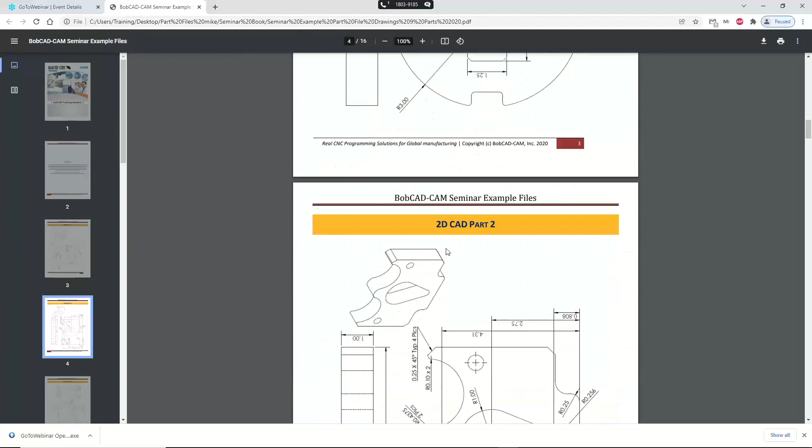All right, so here we have a little book. Some of you guys may have seen this before. I use it for a lot of my trainings. But we're going to just draw one of these parts. I know I did this one last time we did plasma, but I don't think I've done this one. So we'll do this real simple part. This training is not really for CAD. If you want to see more CAD, we have a few CAD videos on the BobCAD support website. But I'll just draw this one real quick. Very simple part to make.

And we're going to start off by drawing two circles, two arcs on the screen. One that's got a radius of 1 inch, one that's got a radius of 3 inches. We're going to center them right at XYZ 0. So we're going to start by going to Create 2D, and then Arc. We'll go with a radius of 1 inch, and then hit OK. And then we're going to do a radius of 3 inches, and then hit OK. And there is the two outer arcs for this part right here. So we have the inner there and the outer there. So again, a 1 inch radius and a 3 inch radius.

Now, after we have that done, we're just going to go into the rectangle command, and we're going to make two different size rectangles. One that is 3 by 1 1/4, and another one that is 1 by 1. Now, the 3 by 1 1/4 also has 1/8 inch chamfers on it. So remember, while you're creating your rectangle, if all four corners of the rectangle show a chamfer, put them in right then and there. That way you don't have to go back and add the chamfer later on. You could just have it in the model. So that has 1/8 inch chamfers, and the 1 by 1 square that we're going to make has 1/8 inch fillets. So we're just going to go back to BobCAD, and I'm going to go to rectangle.

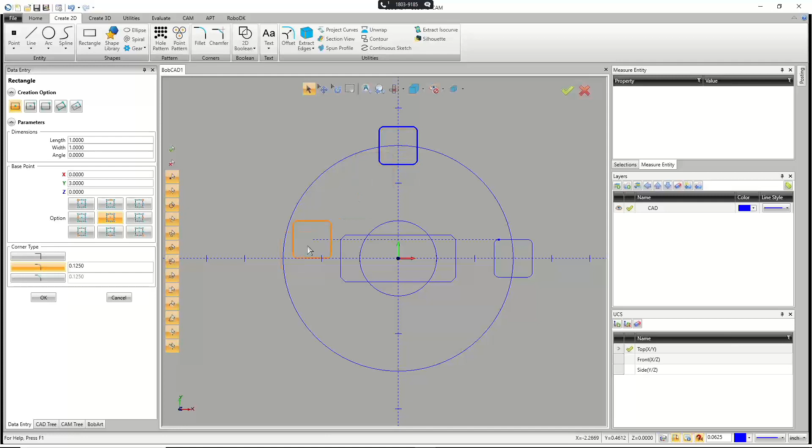Now what I can do is I'm just going to take the center of this square and I'm going to put it right at the 3 o'clock position. So I'm just going to click it and put it right there. Now you have multiple ways of creating the other 3 cuts. I'm going to do the simplest way because I'm already inside the feature for rectangle. So I'm just going to use the snap points to snap another one at 12 o'clock, another one at 9 o'clock, and another one at 6 o'clock. But you could have just used the original and done a rotate, and that's how I do it a lot of times when I'm teaching people how to use the rotate command.

From here, we then would use quick trim to trim away all the geometry normally. That's normally what I'd be using, but there's a feature that's overlooked a lot of times. I call it a luxury feature. It's not needed, but it is helpful. And so this feature is called 2D Boolean under the Create 2D. And it allows us to do adds and subtractions of wireframe geometry.

So for the inside pocket there, if we look at our drawing, I have no lines through here. So I want to get rid of all the intersecting lines that are inside this inside pocket that we have. Now, when we do the 2D Boolean, we have add, subtract, and intersect. Anytime you're trying to basically clear out the inside pieces of geometry, you're usually going to be adding two shapes together. And that's what we're about to do.

We're going to add the arc and the rectangle together. Again, this is a luxury feature. All the things I'm about to do, I could also do with just a quick trim. I could just go in and trim out all the entities just by clicking on it, but it's a lot more clicks. So I'm going to go up to 2D Boolean, and it starts off on add.

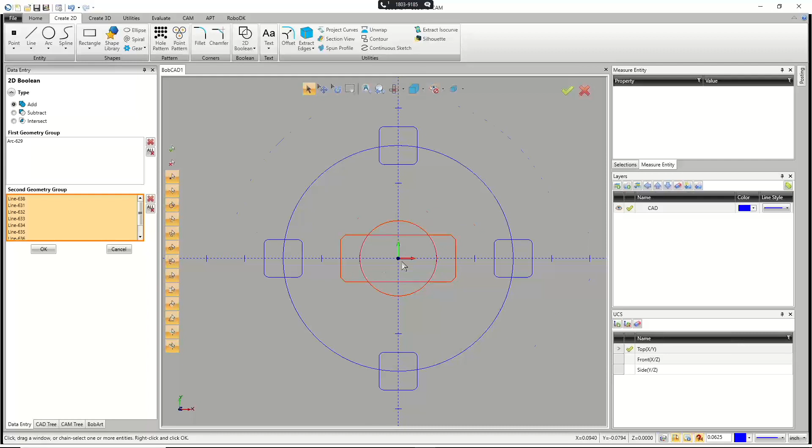And then if you actually zoom in on the feature and you look at it, my preview color currently is orange, but you can see that the outer border all the way around stays orange, and then the inner lines here are the selection color. They're red. And so what that's showing you is anything that's orange is going to stay, and anything that's red is going to disappear. So when I hit OK, it automatically trims that out. Again, you could just use quick trim for that as well.

The 2D Boolean feature is a great feature. It doesn't work for every situation, and that's why I usually would say use quick trim anyway, just because it is good for just about every situation. And the other side of this is going to be the subtract function. Now, with add, it doesn't matter if I pick the arc first or the rectangle. It doesn't matter which order I pick those in. I picked the arc, then the rectangle, but I could reverse that and it'd be just fine.

With the subtract function, you have to pick it in the correct order. And it's the same as if you ever do a 3D Boolean as well for a solid model. Basically, you want to pick what you want to keep and then pick what you want to remove from that. All right. So for me, I want to keep this arc and I want to remove all 4 squares from the arc. So I'm just holding shift and picking all 4 of these squares.

I don't have to hold shift when I pick the arc, by the way, because it's a single entity. If it was broken into multiple pieces, though, I definitely would have to hold shift and pick it. But just remember, holding shift and clicking on a chain of entities will do a chain select and grab all of them.

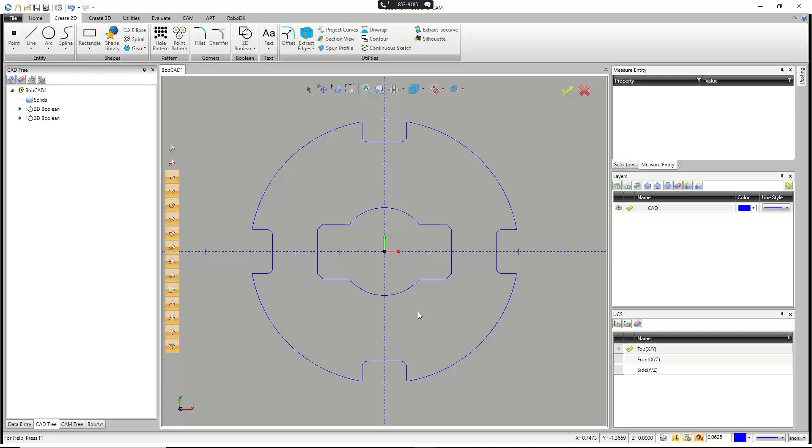So now what we have is, again, the preview showing what's going to stay, and it's all these little cutouts around here. So we can hit OK. It automatically trims it. Again, nothing different than if I had just used quick trim, but it is a little bit faster if I wasn't talking the whole time. So now what we need to do is just add some fillets onto the corners. The corners are 90 thousandths.

So we're just going to go to fillet and then chains because I want to do all the sharp corners. And then right here for the radius, I'll just say 90. And what chains is going to do is it's specifically looking for sharp corners that don't have a radius in them. The thing with this is it's even going to radius corners that already have a chamfer on them. So if I was to hold shift and pick this, you'll see we do add a little radius to that corner.

Not a bad idea if you're trying to get the most accurate look to your part, because, especially for a mill, it can never cut a perfectly sharp corner. Neither can most of the things we're doing. Everything's going to leave some sort of radius. It just depends on the diameter of our plasma or our water jet or whatever. So it will put it on any sharp corner.

So in our case, we're just going to hold shift and pick this. And the only sharp corners we have are these ones right here. Since these ones have a fillet in them already, it doesn't try and add another fillet or change the fillet. It's just going to do it to the sharp corners. So I'll just go ahead and hit OK, cancel out, and there is my little radius there. So there is the part. All right, so now we're ready to start machining.

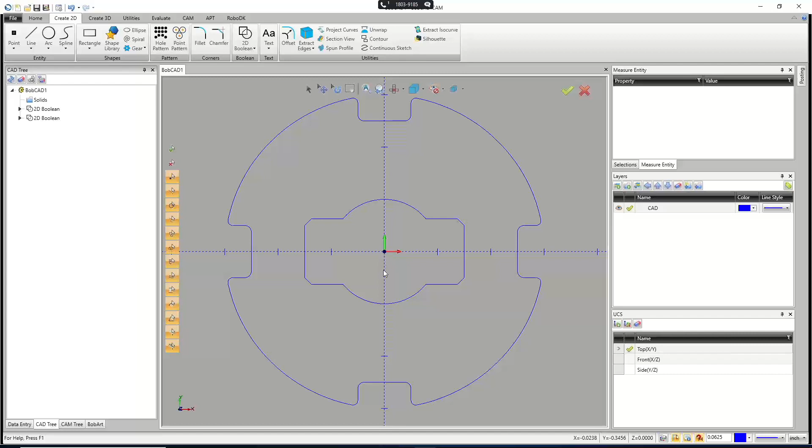Now, one thing that's been a constant issue, especially depending on your machine, is where do you set your parts up when you're going to cut this? Now, if your machine homes out in, say, the bottom XY corner, so say this is our home position. Depending on your machine, you may draw up in this quadrant right here. You may draw in this quadrant here.

It just depends on where your machine homes out from and where the negative Y values and negative X values are versus positive Ys. Basically, if you set your machine in the corner of the table and you jog the machine in a positive direction, if it can go positive, it would be based on these two coordinates. The direction those arrows are pointing in are your positive directions.

Now, the way that I kind of think about this is if I'm working on a machine. I actually just finished a training a little while ago, and the guy has just a 2x2 router. So we'll keep it simple. We'll go 24x24. This is the same as any of you guys that have a 4x8, 5x10, whatever size table you have. Basically I could go in here and say it's 24 by 24.

And right now, BobCAD's going to center that rectangle on XYZ0 because my base point is XYZ0, and I said, go put the center on there. But really when I do this, what I like to do is choose one of these 4 corner buttons, and that will be kind of my origin. So again, you need to know where that origin needs to be placed on the machine.

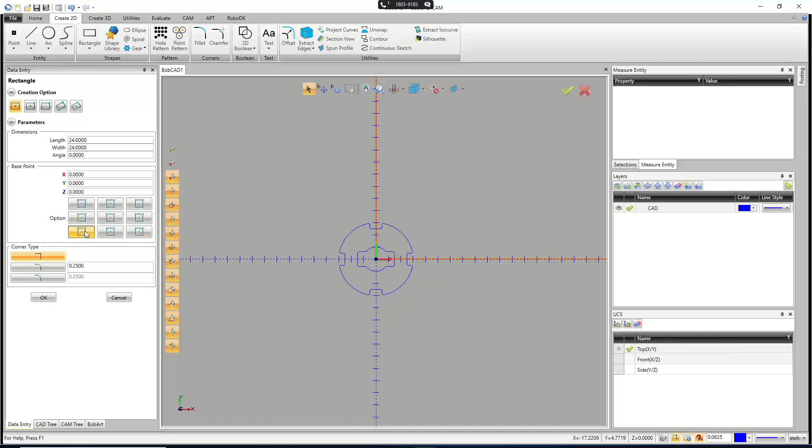And then I could go ahead and pick, I'm going to say it's all up in the upper right-hand quadrant. So I'll say use the bottom left-hand corner and put it at XYZ0. And I'll hit OK and cancel out. And what we see now is kind of a visual representation of that material sitting on the machine.

So basically, if all my code is based off of this point right here, and I have a sheet of material on the machine, I can move this part anywhere inside that rectangle where it fits, and it should give me a good cut. So before I go and do any toolpathing, I need to move this part.

But I also want to talk about how some of your machines don't have a work offset. Your machine might use a G92 in the beginning of the code. The G92 is the home position from where the head is currently sitting at the machine. So if your machine uses a G92, you're just going to put the plasma or waterjet near the area you want to start. And then when you hit start, it takes that location as your 0, 0, and all your code's based off of that.

So let me just grab this part real quick. I'm just going to go home and copy, and then I'll open a new window, and I'm just going to paste it down right there in the middle. Now, right now, we're visualizing an entire table that we're going to be working with. But say I didn't have a full table worth of material. I just had one piece of material out on the machine.

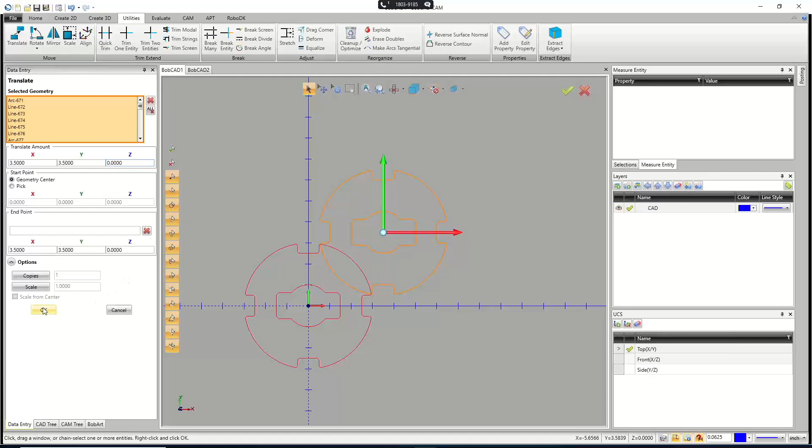So we're going to go a little bit more. I'll go 3.5 inches over, and that'll give me now a 1/2 inch gap between the edge of the material and the part. I'm saying I have 1/2 inch margins. Now, since this is a round part, we could also shift up in Y the same amount, 3.5, and it'll put it right there. When we're done, we can hit OK and then cancel out.

So now visually, we can see that I'm cutting one of these parts on that sheet. And what we're going to do in a few minutes is we're actually going to cut a bunch of these. We're going to do a pattern of these parts.

So just to do one machining job for now, I'm just going to go over to my CAM tree. And right here where it says CAM defaults, to start a new job, we're going to right click and go to new job.

Now inside of here, we have our milling job type. A lot of you guys might have just the milling. You don't have lathe or mill turn or wire EDM. So it's going to be the only option you have.

Now, if you're using BobCAD for only your laser, your plasma, or your Waterjet, I would recommend getting your machine saved as a default so that you don't have to change it.

For some of you guys, though, I know that you have both mills, lathes, as well as a plasma. I've worked with some of you guys in doing some online training before. So you might have a different default machine that pops up. We just need to make sure that BobCAD knows that we're using a laser, a plasma, or a Waterjet.

And usually when you get a post created by the post department, they will give you a machine and the post processor, so it's something that should pop up. And when you install a post from the posting guys, it'll also set the default for that machine, so you won't have to come back and change that.

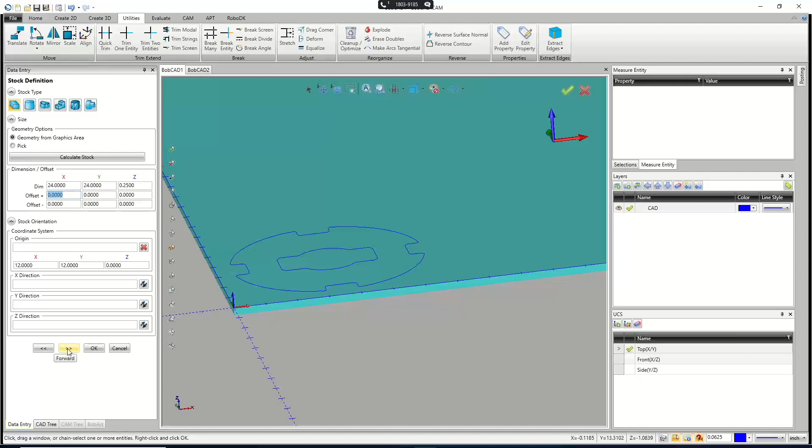And then when we hit the next arrow here, or the forward button, the origin pops up right there at the top of my part at that XYZ0 location. And that's the whole reason we put our rectangle, our stock on the screen, was so that we can see where our coordinates are going to be based off of in that bottom left-hand corner, and also so I don't have to actually pick anything or change anything. So now I can go ahead and hit OK.

And there is my job setup. So the whole job is set up. For now, we'll just cut one, but then we'll turn it into a few more. So there is my part. I'm then going to right-click on Machine Setup 1 and go down to the Mill 2 axis.

Now, inside of here, when we say Select Geometry, we're just going to pick all the geometry we want to run right there. Always look at your chains. We have one pocket on the inside and one profile on the outside, or it's all profiles, really. But we should have that many chains. There's 2 chains currently showing.

The other thing we can do at this point right now is set up the start points for these. This is where the leads are going to happen. So I'll start the leads for the outer cut right on the middle of this line here, or let's do it closer to our origin. We'll do it right there. And then the center pocket, I'm going to pick the straight line here.

Now, one thing to pay attention to is the direction that you're cutting in. And if this was a mill and we were climb milling, I would need to reverse the direction of both of these features, because for a climb mill, I need to compensate to the left. And to the left of both of these features puts us on the inside here and the outside here, so it's reversed. But with laser, plasma, waterjet, you don't have a rotational force like you do with an end mill.

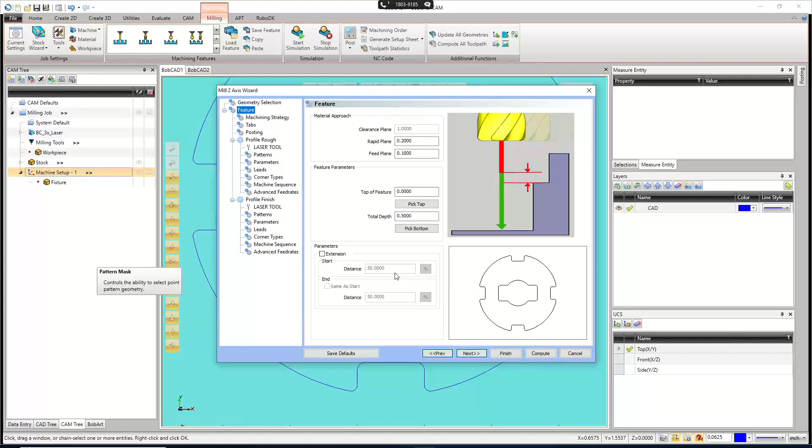So the 1/2 inch depth is fine. I mean, I have a 1/4 inch, but a 1/2 inch is fine because you're cutting through the part. You're going all the way through with this. And so when we're done, we can hit OK and then hit next. Right here for the feature page, top of features at 0, total depth is at just a 1/2 inch. So nothing to really change there. I'm fine with the depth, so next again.

For the machining strategy, there's only one toolpath you're going to use, and it's a profile finish. So you click on Profile Rough and hit this red X here, and you're left with just your profile finish. From there, you just hit Next, and you have tabs. Now, I'm going to do a little example of how I would do tabs on a part like this. I do not use this tab function. I actually just draw my tabs, and I'll show you real easy how I do it. And so we'll go ahead and hit Next for now.

Right here, we have our posting tab. So really the only thing you need to pay attention to here is if your machine uses a work offset, you need to make sure this matches the work offset value you plan on using. So if it's a G54, then work offset number 1 would be the G54. 2 would be G55. 3 would be G56, and so on.

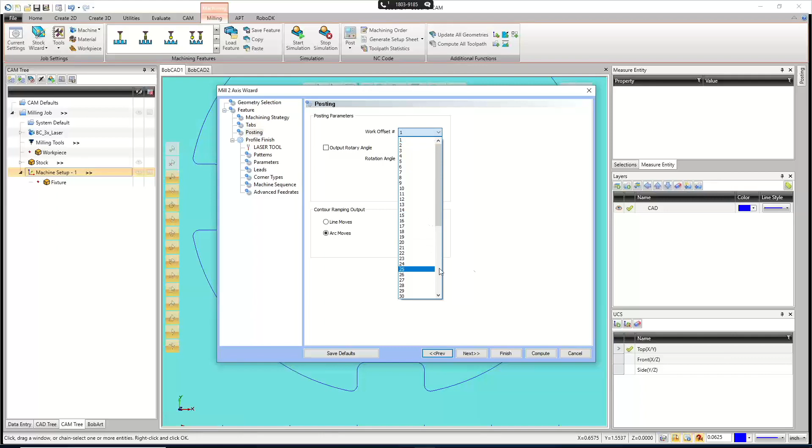Next, again, we finally get to define the laser that we're using. So we set up the diameter. This might be something you don't know off the top of your head. You might have to do some testing or contact whoever makes the nozzles for your machine and just find out what they would recommend for the diameter. You might be able to look in the manual as well and see if there's anything listed out.

You'll see right there for the diameter. Right now it's set to, we'll say, 10 thousandths. I'm going to leave it there. This is a laser, but your waterjet or plasma is probably going to be a little bit bigger than this. This is one of the smaller options you can get with the diameter.

At the beginning of this, I was talking about the two different ways you'll set up a toolpath here in BobCAD. The two ways are either you're going to be setting up all your feeds and speeds, and in this case, you could set up your cutter, your gas, and your shutter.

You're going to set it up either in BobCAD or not. Right now, if I don't add any feeds and speeds to this, when I go to compute my code, I'm essentially just giving it the path to follow, and then at the machine I can set up the cutting conditions. If you're lucky enough to have a machine like that, it makes BobCAD a lot easier, because really you make one toolpath and it doesn't matter the thickness of the material. You just give it the path to follow, and then at the machine you define the thickness, the pierce, all that stuff.

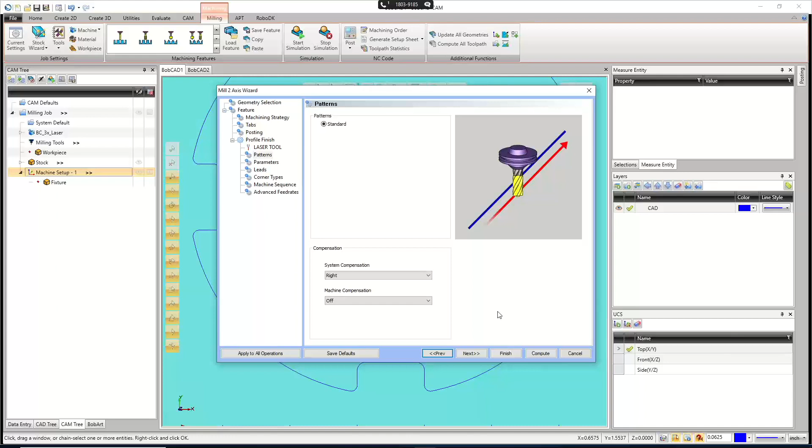So next we then have our parameters. This is a finish pass, and specifically we use finish passes because they're made for finishing.

Move my microphone, give me one second. I got to take a drink.

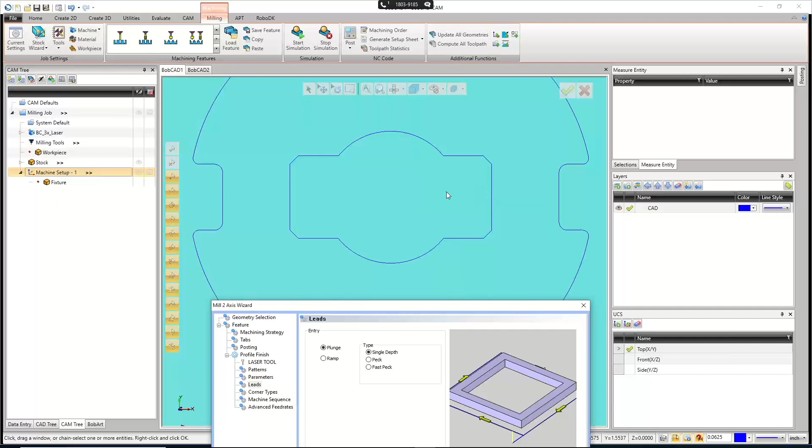Now, one other thing you can do just in case is when you lead in, you can cut around the part, and then either lead in or lead out in the exact same spot you led in from, or right here we could do an overlap amount. And the overlap amount allows us to just say, I want to go past where I led in from by, we'll just say 100 thousandths, and then have our lead out happen. Perfect. We'll go next. Right here for the corner types, I'm not changing anything on that page. Just going to hit next again.

As far as machine sequencing goes, I always use optimized. BobCAD is smart enough to recognize inside versus outside shapes. So it knows that it needs to go cut the pocket of this geometry before it cuts the outside profile. So we shouldn't have to worry about it. The sorting's pretty good. And really, it's two pieces, but it's one internal and one external. So there really is no wrong sorting for this.

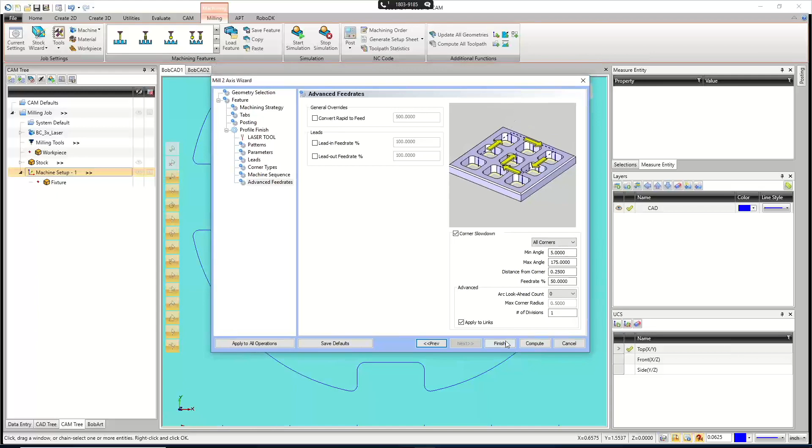And finally, we then have our advanced feed rates. So we can convert our rapids to feeds, which shouldn't be anything you need to really take care of here. Your lead in, lead out feed, none of this really matters. Down here, though, is the corner slowdown. Now, you got to think, I'm just going to hit finish on here. As you go and make a cut, and I'll try and figure out how I can show this.

A lot of people picture the cut that you make a little bit differently than what it really is. And for those of you that have used a hand plasma, you kind of know what it's like. The stream of plasma is not going straight down. As it's moving, it's actually got a curve. It kind of goes backwards. So what ends up happening is when you get into a corner, basically we want the plasma to catch back up with itself.

We want the end of the plasma that's blasting through the material to straighten itself back out. So what this corner slowdown option allows us to do is say when I get close to a corner, so I can do it for all the corners, I can tell it within a quarter inch of a corner, I want to slow down to a 50% feed rate. And what that's going to do is as we encounter that corner, it'll slow everything down, kind of let the plasma catch up to itself, and then make the turn so we don't accidentally blow off a corner or just have a really bad finish in the corner.

This corner slowdown is specifically made for mostly plasma, but you could use it for your laser as well as your water jet. But I'm not going to run anything like that right now. When we can't hit next anymore, we're just going to hit compute. Now, this is a really small tool path, so I'm going to go ahead and blank out my stock right here, and then I'll zoom in, and there is my tool path. It's only 10 thousandths, so I'm only offset by 5 thousandths right now, and there's our one part.

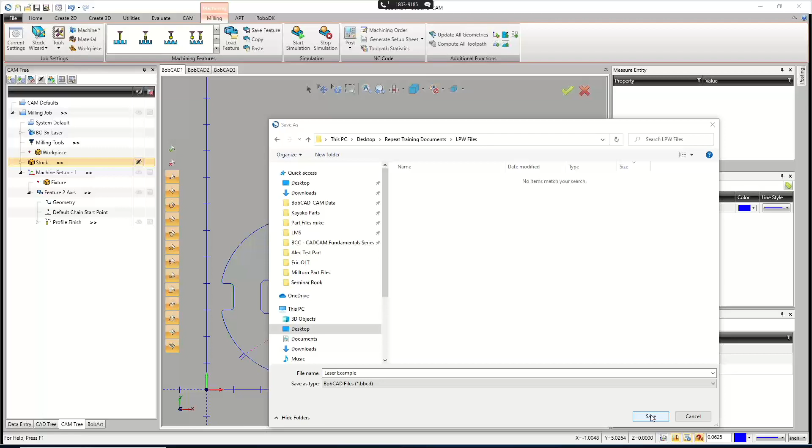So I'm just going to go ahead and say save as, and let me put this on desktop, repeat training. Did I not make a folder? All right, so let me go ahead and make a folder real quick. And I'll call it Laser Plasma Waterjet Files. And say open. And then we'll do, this is the laser example. All right, there we go. All right, so we now have it saved. So I always make sure to save right before I launch the simulation. Anytime I launch the simulation, I save.

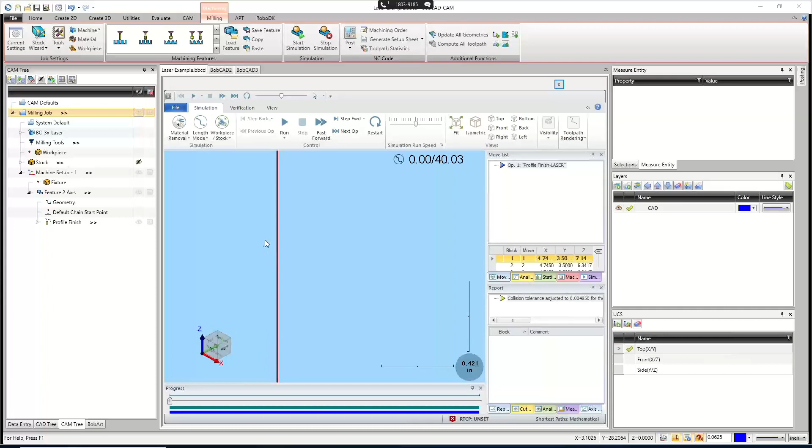So we're going to go right here to start simulation. And we'll just wait for it to load up. Now your laser and your plasma, and we're going to do a plasma example because it's a little bigger, show up as red in here, and your water jet will show up as blue. But essentially what it looks like is it's almost like there's an end mill, in this case, a real tiny end mill. And that's just the view of it. That's how it sets it up, just so we can see everything. So I'll set my speed a little slow on this. It shouldn't take too long to run. And then just say run.

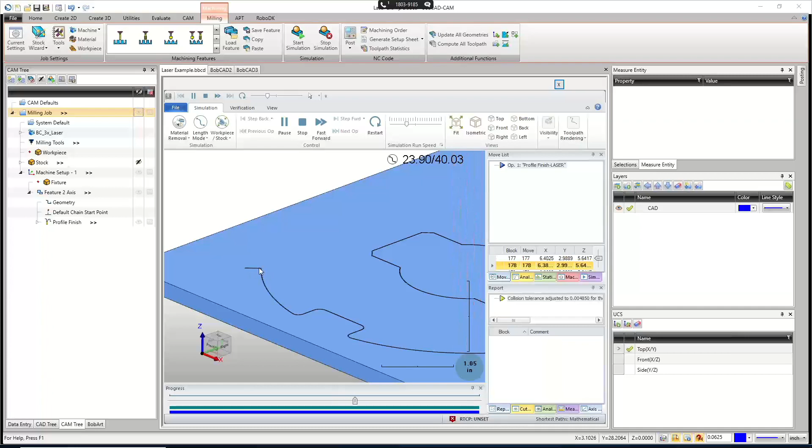And we'll see. There's our first lead in. And we should be coming through the whole part, so we should see the same thing on the other side. And there's our lead in and around over the end, and then leads out. And we should have the same thing here when we do that. We'll overlap that and then come out. At that point, it doesn't matter. That part's free as soon as it closes the cut anyway. But there we go. It's just going to cut its way around. And right there. So there we have it.

Now to see that individual part, there's a feature in here that some of you guys might have clicked on by accident before because it's really annoying when you don't know what it is. Under the measure tab here, normally when you're working in the simulation, you want to leave this guy on off. And the reason being, when you rotate inside the simulation, you left click and hold and move your mouse to rotate. But the way you do a shortcut rotate inside of the CAD window where we drew this part is by clicking the middle mouse wheel like a button and moving your cursor. The problem is I always come into here and use my middle mouse wheel as my rotate command because I always forget that it's a left click inside the simulation.

So if the measure entity or the measure box is turned on to something, it will actually do those things as you click on them. So I'm putting down points on that surface.

What I really want to do is down here we have the remove chips options. So there's remove chips, select chips, which allows me to go in and pick what I want to get rid of. So if I click this middle section with my middle mouse wheel, it'll trim away the inside. If I click the outer piece, it'll trim away the outside because it's no longer connected to that material. And so now I can see what my part should come out looking like and overall the finish and everything.

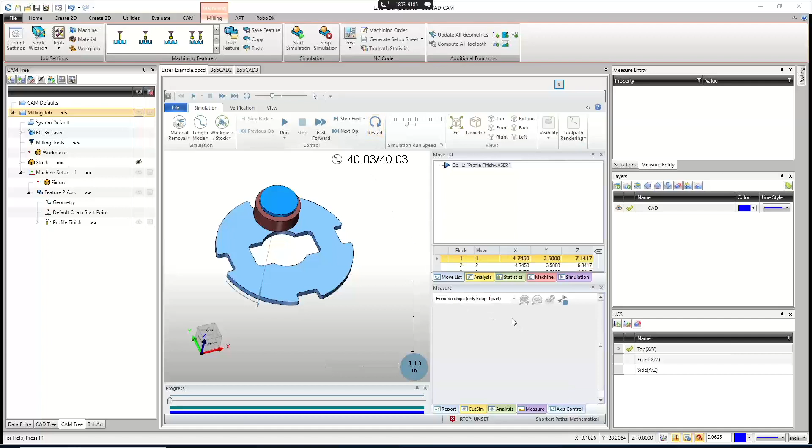Another way of doing this, and I don't recommend running it this way, especially with a sheet this large, but there is an option called remove chips by volume. And this one allows you to remove chips that are smaller than a certain size and also remove any chips that happen during the simulation. So as the simulation's running, as it finishes a cut, it should automatically disappear. So right here, as it finishes this part, the inside should automatically disappear.

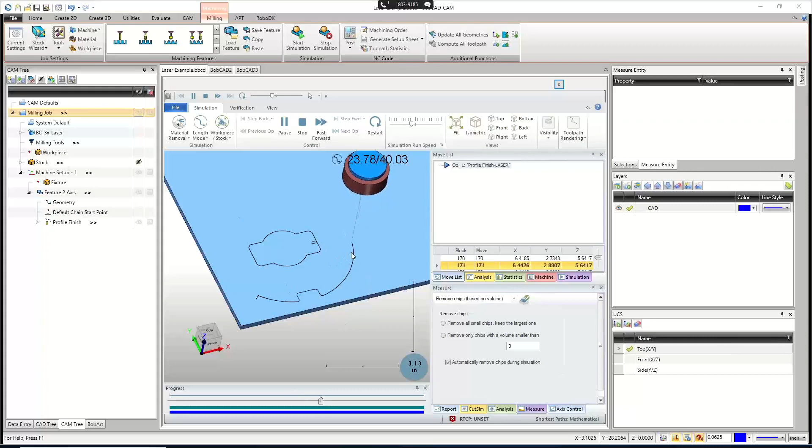Now, we might run into some problems with this one because the larger piece of stock might be around it. Normally, I would use this on a bunch of parts where the sheet isn't the biggest area, I guess. But there it is, same cut. And there we go. So nothing fell out. I just have to do my remove chips. Nothing's seen as small enough because I didn't really do this.

So I'd have to say remove chips with a volume smaller than, I don't know, 1. And so I'll say refresh. That didn't do anything. We'll say 2. I don't know what kind of measurement this thing uses. There it is. So whatever the volume is smaller than 2 of, I don't know what units, but you'll see it automatically got rid of that piece. And if I went bigger and bigger, eventually this piece would disappear and leave just the stock around there. So just be aware that that is a thing.

When you're done using this remove chips button, though, make sure to turn it back off. Because if you accidentally come in here and click with your middle mouse wheel, it'll get rid of a lot of material. And clicking with the middle mouse wheel, even in the middle of a feature, will actually trim away that geometry as well. So just be aware of it. It's the differences in how we rotate between the CAD window and the simulation. So I do it all the time and accidentally trim geometry out that I didn't mean to. But there it is.

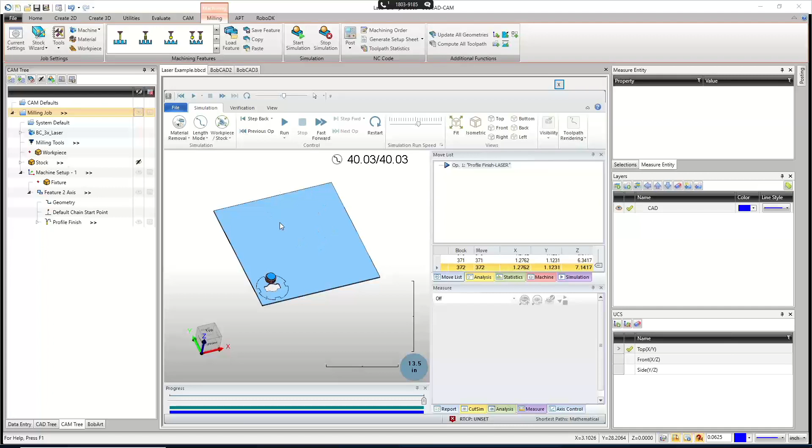So what was I talking about with saving toolpaths earlier? Well, after we have this toolpath done, and in my case, the way I set it up right now is I said that the feeds and speeds don't matter. I'm setting up all the cutting conditions out at the machine. So at this point, I could actually save this toolpath. So I'm just going to right-click on the Feature 2 axis and say Save Feature. And then this is going to be my laser profile. And then just say Save.

Now, after I have that saved, and this is the best part, I'll pretend I'm starting a whole new job. And so there's no toolpath on here. Well, now what I can do is I've got my geometry in the right location. I've got the stock drawn out. And so when I go and do this, it's going to be the same steps. I'm going to go create my stock wizard. This time I'll do the laser again because I got that saved. And then I'll load my stock wizard. I'll create a piece of stock.

I'll set my thickness. And again, because I don't have feeds and speeds and I'm going to do all my cutting conditions out at the machine, I could now set this to whatever I want. For the tool path that I saved, the depth is set to 1/2 inch. So if I want to simulate properly, I would want to make this smaller than 1/2 inch, or go and resave that tool path and have it go 2 inches deep.

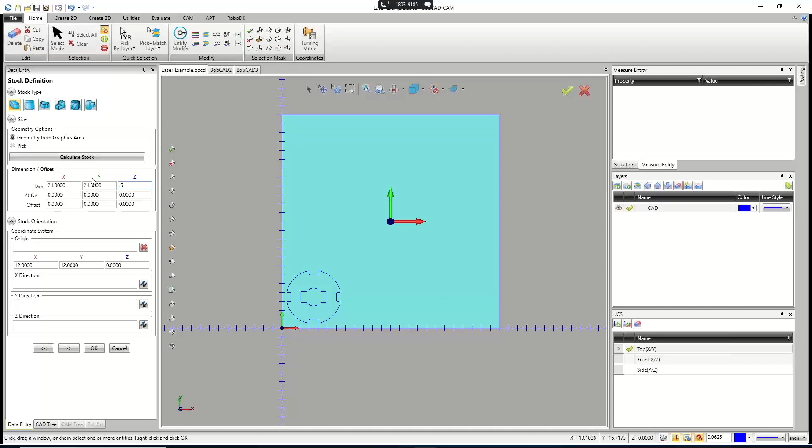The depth that we set inside the feature is irrelevant with all these machines because you're riding around on the top of it and blasting through. So it really doesn't matter. But I'll go with the 1/2 inch thickness and then hit next. And then right here, our origin is in the same spot, and then hit OK.

Now from here, I can just right click on Machine Setup 1, go down to Load Feature, and I'm going to choose my laser profile and hit Open. It'll ask if I want to use the same top and depth values. Absolutely. The top for every one of these jobs should be 0. And then the depth is kind of irrelevant. But again, to make it simulate properly, you need to make sure your depth is at least thicker than your stock or the same size. In my case, it's a 1/2 inch. We should get a result.

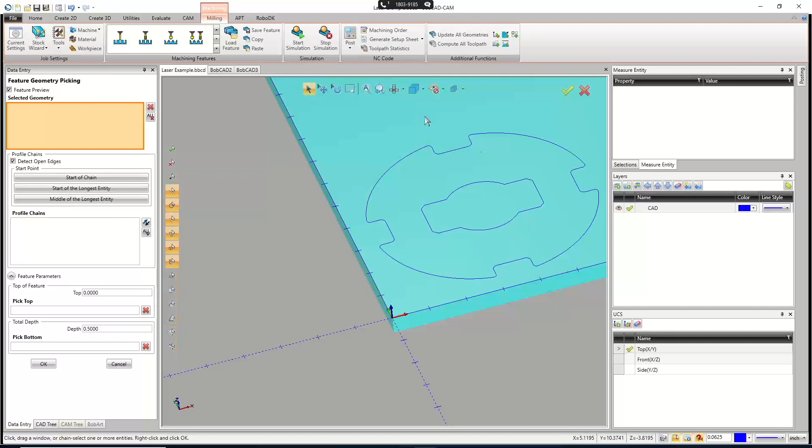After you load a toolpath, it's the same as copy and paste. So copy and paste, save and load. Whenever you copy a toolpath or you load a toolpath that's been saved, the geometry is the only thing that we forget about. So if I right click on the word geometry here and say reselect, let me go to a top view, I can pick all my geometry once again. And then over here under profile chains, I would then go in and make sure to pick my start points.

And again, I'm not reversing the direction of this because right now my toolpath is saved with a right-sided compensation.

Whoops, sorry, I punched the microphone there.

So for this one, to the right puts us on the outside, and for this one, to the right puts us on the inside. I explained it to someone last week, and he liked it a lot. That's how he kept thinking about it. But the way I've always pictured how I know if I'm supposed to go to the left or the right is I picture myself walking down the line. Left side, in this case, puts us on the inside. Right side puts us on the outside.

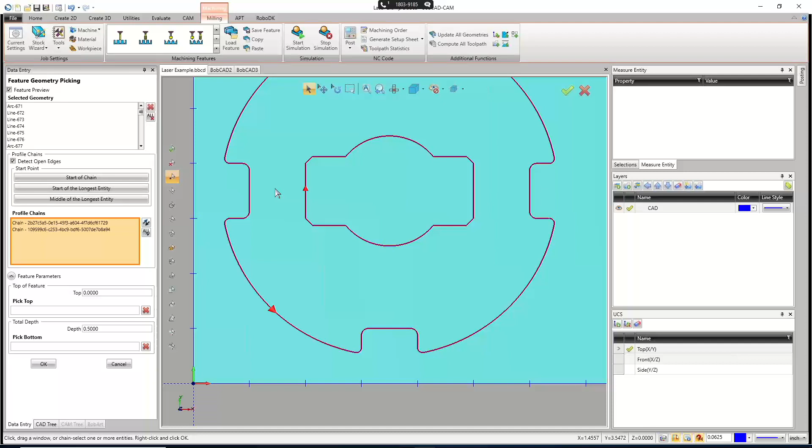It's a real easy thing to picture because even some guys get confused when the arrow's pointing a different way. If that's the case, move it to the other side. And now you'll see, okay, to the right puts us inside, to the left puts us outside. We always want to set up our geometry for however we set up the toolpath. And for me, that was with a right side compensation. So all I got to do is hit OK, compute that toolpath, and there it is. We're done.

All right. When it comes to posting, how do we post? We just say post up at the top. You got to make sure you have the correct post processor first, but I'll just say post, and there is all of my code. Now, another thing we can do is make an array of parts. So I want to fit a few of these in here, get a whole sheet of these things. And we need to just know kind of how many are going to fit.

And the way I do this is with the translate function. So first, let me blank out my stock here, and I'll blank out my toolpath. Now, you do not have to move the geometry. That's one of the biggest things here. You don't actually have to make copies of the geometry. I'm going to, and then I'll hide them to show you. But I do like to make copies of them first, just so I know how many I can fit. So I'll go up to the Utilities tab, and then I'm going to use the translate function.

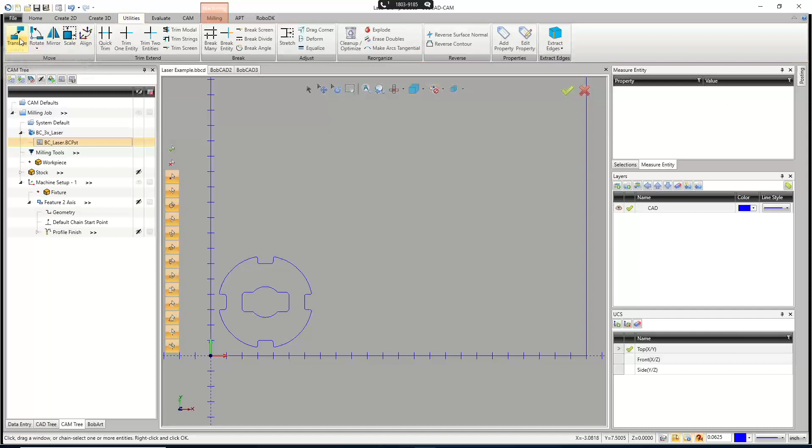Just like before, I know where I'm sitting, and I just need to make sure I give a gap large enough to fit parts between this. So I'm just going to go ahead and pick that part. And then in my y-axis, we're not going to move for now. We're just going to set up enough that I can fit 2 of these next to each other. So it should be about 6. And for this laser, that's actually probably close enough because the laser's only 10 thousandths wide. But for now, just to set it up the same way, I'll go 6 1/4. So 6.25.

Just like that. From there, I can then say how many copies fit. Well, I think 3 is the only value. I think we can only fit 3. So you'll see if I add 3 copies, it gives us 4 because we take the original and then add the number of copies. And so you'll see we're sticking out past the edge of the part right there. So I'd have to go with 2.

Now, I'm wasting a bit of sheet, but we could adjust things and kind of move things around later on. But I'll go ahead and hit OK. And then from there, I'm just going to drag a box over all 3 of those parts. And I'm going to offset them upward. So we're going to zero out the X and put a 6.25 for the Y. And now I have 9.

And I can't fit another part there. Definitely not, because it's the same width as before. Yeah, okay. So we'll go 2 copies and then just hit OK. So now I'd be cutting 9 of these parts out. And this isn't the most efficient way of cutting these arcs.

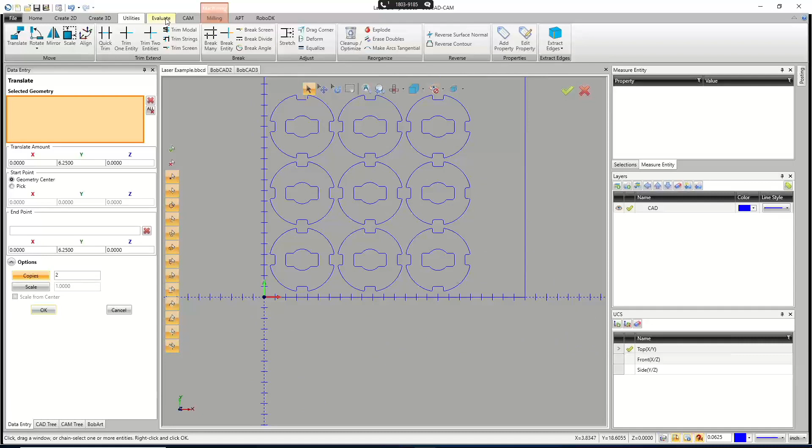Really what I'd want to do is probably go to my translate feature again and pick all of these middle shapes. Let's see if I can get this right down the middle. We could pick all 3 of these, and then I would shift them over. So I'll say about 3 inches, because that's the diameter. And that would center us up in the middle, and then we could tighten that in and actually move these down a little bit. I still have copies turned on, turn those off.

So the orange that we see there would be the new positions of these 3. Still only going to fit 3 parts, though. We might be able to move these close enough. Really, it's my margins that are probably throwing us off. And, well, actually, it's the fact that we're using a 24 by 24 piece of stock right now.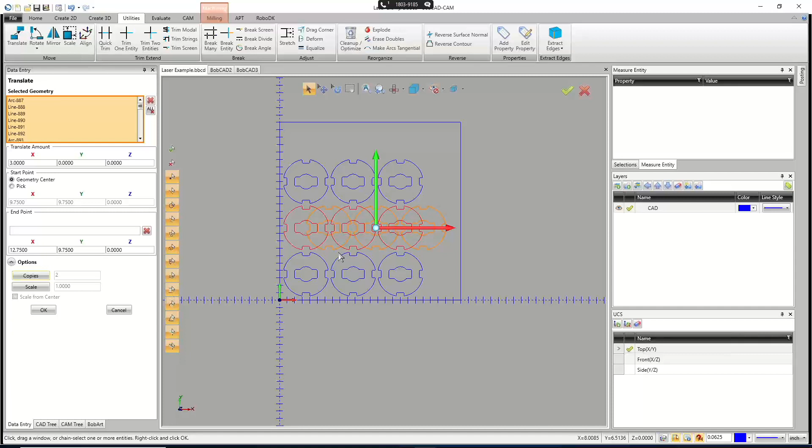I got a 6-inch diameter part, so the most I could ever fit would be 4 parts across, but that'd be with no gap between them. So not something I'm going to do. So 9 parts is what we'll get. So if I wanted to do all 9 parts right now, I could go in, let me remove the old geometry. I'll reselect the new, and I'm just going to drag a box over all 9 of these parts.

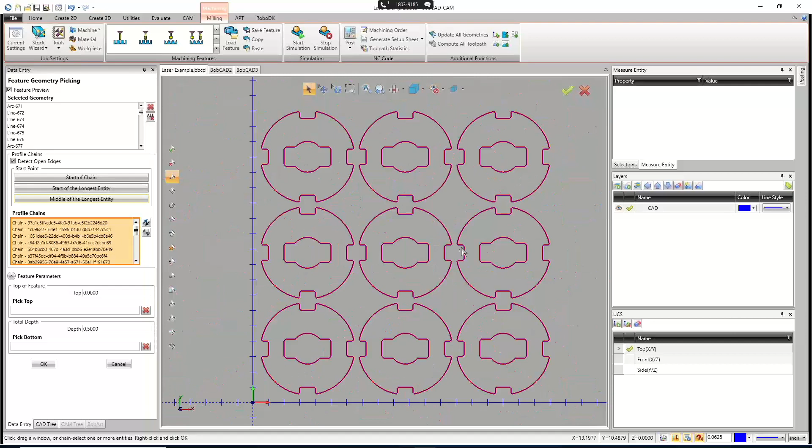Now, the problem is I now have to figure out where's a good start point for all of these, and I have to set up the start point for every single one. So just picking it. Another thing you could do is right here, we could say use the start of a chain, use the start of the longest entity, or in my case, I could say let's use the middle of the longest entity. And you'll see that actually set all of my coordinates for all the outside shapes into the corner I actually wanted. That's a fine place to be.

But on the middle, I might not want to start on a curve, on a radius. So for the middle, I'll come in and pick all of these right here. So I just got to click all these, grab that one there, and then that there, and finally there. Now when I hit OK and I recompute my toolpath, we'll see all of our toolpaths for all 9 parts. So not a bad way of doing it.

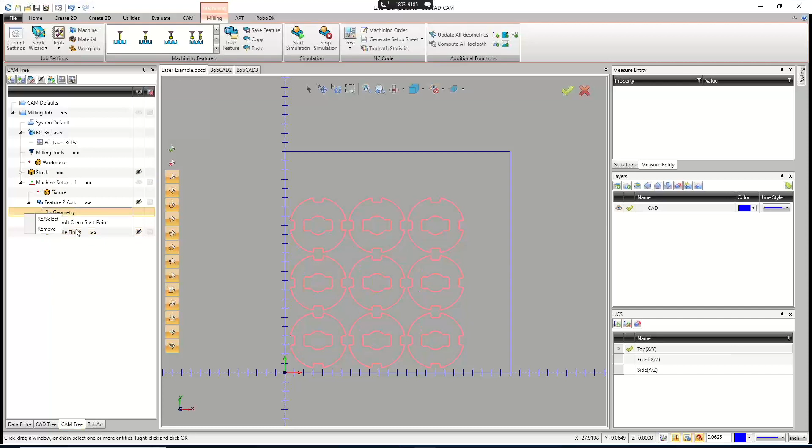It works. Takes a little bit more work because you have to pick all the geometry, repick all the start points and everything. So another way of doing this is, let me go ahead and remove the old geometry there, and I'll just compute to get rid of all the toolpath. And I'm just going to hit undo and bring myself back to 1 part. I now know my distances, which is helpful.

I know that I want to move over 6 1/4 and up 6 1/4. And I know that I need 2 copies. So what I'm going to do now is I'm going to pick a single one of these. So I'm just going to pick this guy here. And then now I only have to define my start points for the 2 start points that I have. Hit OK, and then I can go and compute that toolpath, and there's my cut.

From here, I can right-click on the Feature 2 Axis, and in here we have an option called Add Toolpath Pattern. Now, a toolpath pattern just copies the toolpath, and then we define whether we're going to do an array like we want to. We could do a translate, so we could say I want to cut one of these here in this corner and one in the other corner. I don't know. You could rotate, which not for us at this point. And then we do have points.

So points is a good one if you want to put parts out in kind of random places, I'll say. Not really random, but in other locations. You're going to pick a point to define where you're moving from on your model, and then pick the other points where you want to make a copy.

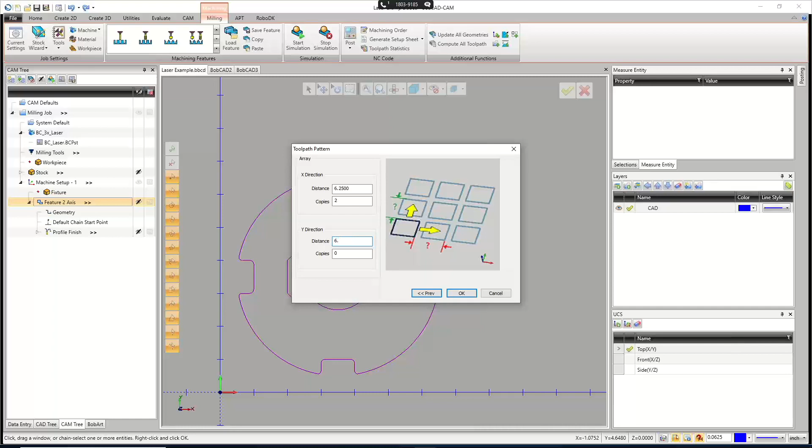But for us, we're going to go with the array command and hit next. We'll say in the X distance we're going to go 6.25, and we have 2 copies total because 3 doesn't fit. And then in the Y, we're going to go 6.25, and again 2 copies total.

When I'm all done, I can hit OK. And there is the array. Same exact toolpath as what we would have gotten if we left all the parts on the screen, as you can see by me undoing that. They all line up perfectly. The difference is I only had to set up and work with one single part.

So now I could hit save, just again, because I'm going to save before I go into the simulation. Start the simulation and wait for it to load. And then now when I say run, I'll leave it kind of slow for now, we'll see it's going to run the inside shape and then the outside shape. And then it's going to move to the next one, just like that.

Now, one thing you may also have to think about is heat for your plasma and everything. Heat might be a problem, so using a toolpath pattern might not be the best option if you're trying to spread the heat across the entire sheet. Maybe you'll cut this part, then this part, then this part, and work your way around. Or maybe this one, then this one, then those ones. It's all up to you how you end up cutting those.

If you want to spread that heat around the part more evenly, the best way to do it is to use the translate feature and make all your copies. So you'd have all your geometry out here, and then you would actually pick them.

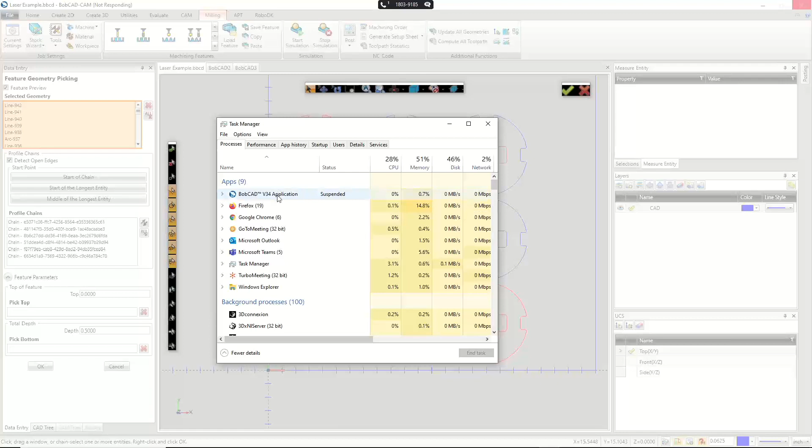Give it a second, I have my task manager up here. Oh, there it goes, BobCAD wasn't loading. So I'm just going to end the task and start it over real quick. Open that up, give it a second to load up. Sorry, guys, it happens.

And today it's been especially slow. Every time it happened earlier actually when I was picking some start points for some stuff. So that's why we save often. Pretty much if you're always saving before you get into the simulation, then a lot of times it should work, so you'll have a fresh copy of it. So try this thing again.

Gonna pick it, pick it, pick it, pick it, pick it, pick it. No, I'm getting some bugginess when I'm selecting geometry. All right, good, this is a good one, we got this recorded too. Perfect, yeah, it's frozen again. I don't know what's going on with that.

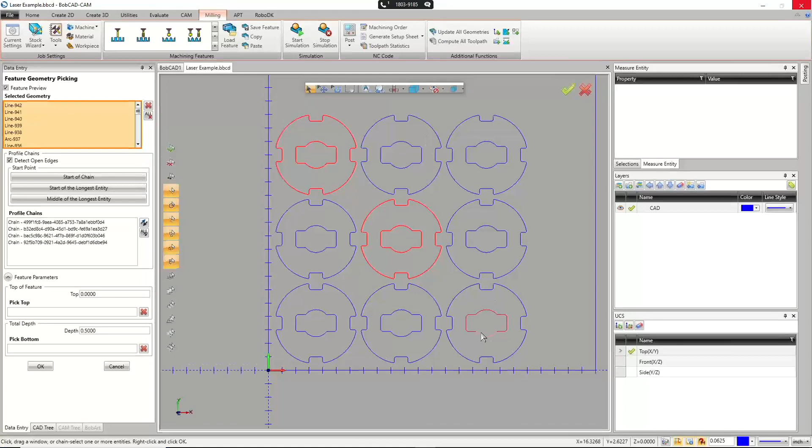But normally when you do this, and I'll report this to the development team and see what the heck's going on, normally when you do this, though, it'll let you pick them in whatever order you want. And so that's super helpful for if you're trying to spread that heat. Now there's one trick to that, and I'll show you here in a second. It's the sorting that you do on it. So I'm just waiting on BobCAD to reload now. There we go.

Come on... there we go. All right, so I'll reopen my part right there. I'm not going to try and pick the geometry again—I don't know what's going on. For whatever reason, whenever I pick the inside shape on one of those...

But normally, if you did pick all the geometry, when you get down to the machine sequence tab, currently I have it set to optimized. The way optimize actually works is it's using one of the other sort orders—either closest, no sorting, X direction, or Y direction. It's basically finding the most efficient one out of all of those, but it doesn't take into account thermal or anything like that.

So optimize is a good choice if you're just doing one part, because it's just going to sort it inside to out. But this no sorting option, a lot of people get thrown off with this. What no sorting is actually doing is going in the order that you pick the geometry.

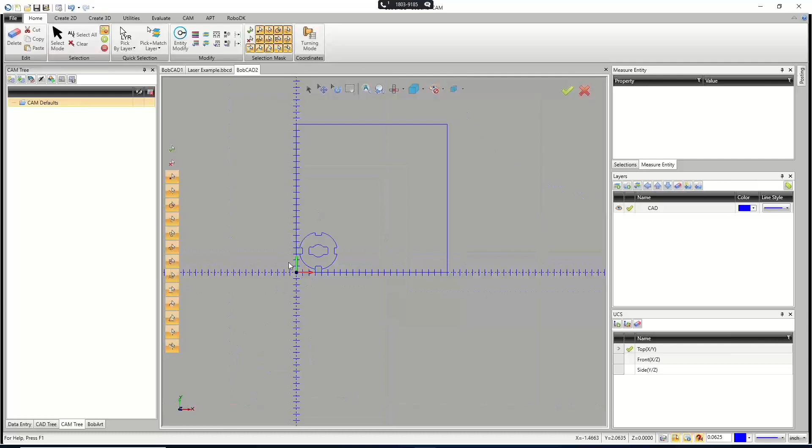All right, so that's a quick run through of it. Now, what I want to do is copy one of these and the outside border right there, cancel out, and open up a new window. I want to show how I do tabs, just because I like control over where the tabs go. The way I do the tabs is basically by breaking the geometry.

So I'm going to create a rectangle that is, let's say, 0.5 by 0.5, or 0.25, whatever. Then I'm going to go and put it right here on this edge, and center it right on that point. Now, I don't want my tab to go this way, so I also want to rotate my rectangle by 45 degrees. And that'll be my little tab.

So I'll hit OK. Now, instead of placing this down and doing all four of them manually, I'm going to go to Utilities, Rotate. I'll hold Shift and pick that little square I just made. Then for the rotation center point, I need to make sure to move this to the middle point here, so that when I do my rotation, it's rotating around the correct center point, or the correct hub.

And then I have four of them I want. So 360 divided by 4 gives us 90 degrees between each part, which is a nice even spacing. Then I'll go with copies, and I need 4 total, and I have drawn 1. So remember, your copies are always your total minus what you've drawn.

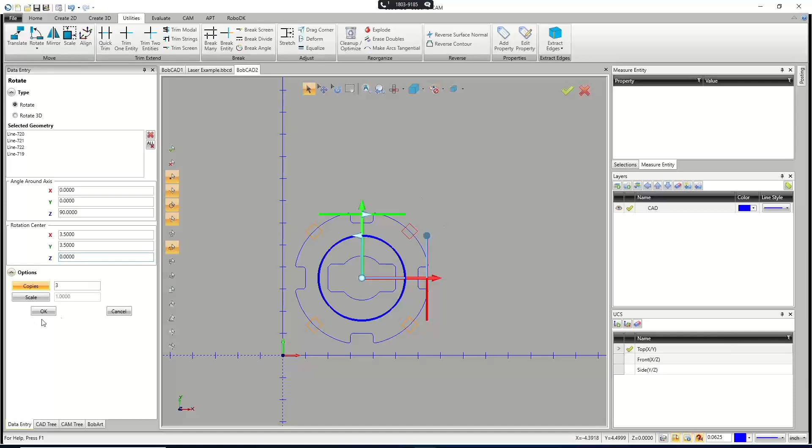So 4 minus 1 is 3. I don't know why I hit 4. And there it is—now we'll see a copy there, there, and there. And we're going to keep our original. So we'll hit OK and cancel out.

So now what I have is these squares that run over the part. I'm just going to start by going in and trimming out all the insides of the square, like so. From there, I'm going to cancel out, grab my select tool, and hold Shift and pick all 4 of those little squares again.

And then delete them, so I'm left with just these broken chains here all the way around. This area is going to stay connected to my sheet of material, and I'm still going to have leads on it.

We're actually going to load in the same toolpath. So right-click, New Job, we'll do our stock wizard, hit Next. Hold on, I picked a milling machine, I'll have to switch it to my laser in a second. Stock there, I'll set my Z depth to 0.5, and once again we'll use that bottom left-hand corner. I'll hit OK, and I forgot to switch my machine here.

So I'm just going to right-click, Edit, choose my laser, and then hit OK. Now when I go into my feature, I can right-click, go down to Load Feature, and I will pick that same laser profile I made earlier. I'll use the same top and depth, and I'll right-click on the word geometry and say reselect.

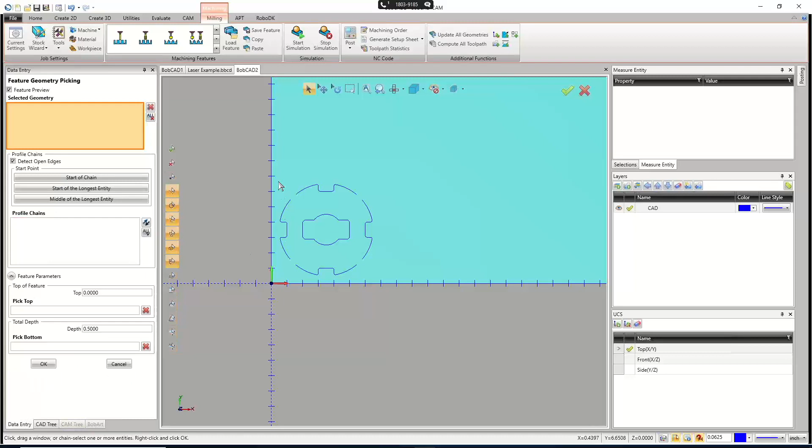Now from here, I'm just going to hold shift and pick all 4 chains. When we're picking a single chain that doesn't connect to something else, but it does have multiple entities in it, you can still chain select. You just need to make sure to hold shift and pick the end of a line. We don't want to pick it at the beginning or the middle of a line like here, because it's only going to chain that section. So we always want to go to the end of a line, hold shift and click, and it'll send the chain along the entire length of the line.

So I'm just holding shift and picking all 4 of those and the inside shape. And then we'll look at our chain. Well, hold on, let me pick the inside shape first, just in case it sees these as not an outside shape. And then I'll just pick all 4 of those, and then we can go and look at it.

So again, think of it: to the right of this one will put us on the outside. And to the right of all of these, as we can see, they're all pointing the same direction, so to the right of all of those will put them on the inside. So this one's wrong and those are wrong, which is good news - that's actually how we want it to be. If something's going to be wrong, we want them both to be wrong so that we can go in and just reverse the direction of all of them. And then I'll hit OK.

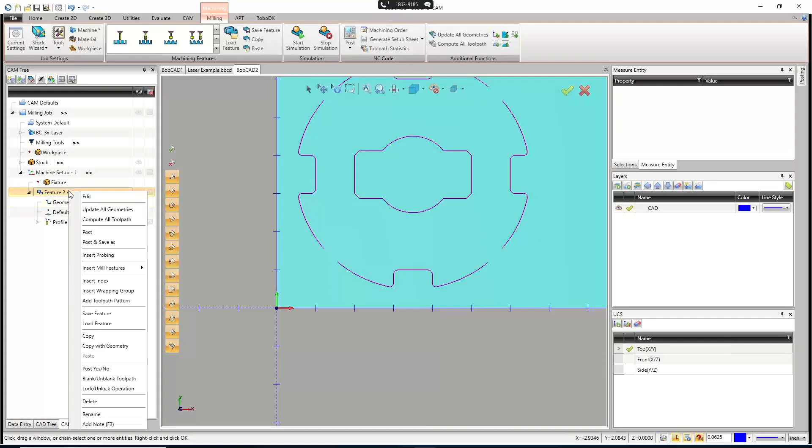And with this toolpath, I already have the right angle leads on it. The only thing I'm going to do is edit my feature, go to the leads tab, and I'm just going to turn off the overlap amount. So I'll delete that and then say compute. Whoops, I forgot to put a 0 - there we go, so put that 0 back in there and then compute.

And so if we blank out our stock and we zoom in, there's our cuts right there. So it's there, cutting around, going around.

And so this will ensure that the machine stops, it'll actually shut the plasma or the laser or water jet off and then move. In the past, I know that the tabs button inside of the 2-axis feature, depending on how your post was set up, it would fail to turn off the cutting command. So it would have a tab in it, but it wouldn't shut off the plasma or the laser, so it would just end up cutting through the tab anyway.

But here we go, we'll say run. And you'll see there is our part. So this would fall away, and then we'd have to come in and cut those off. But we do have something holding that part to the rest of the stock. Especially if you're doing a big sheet of a lot of parts, the last thing we want to do is have a part come loose, tilt up, and then get smacked into by the plasma head or the laser head or whatever. So there it is.

There's some quick, easy tabs. And if you're doing sign making or you're doing logos and stuff, get used to that - you will have to add tabs in pretty often.

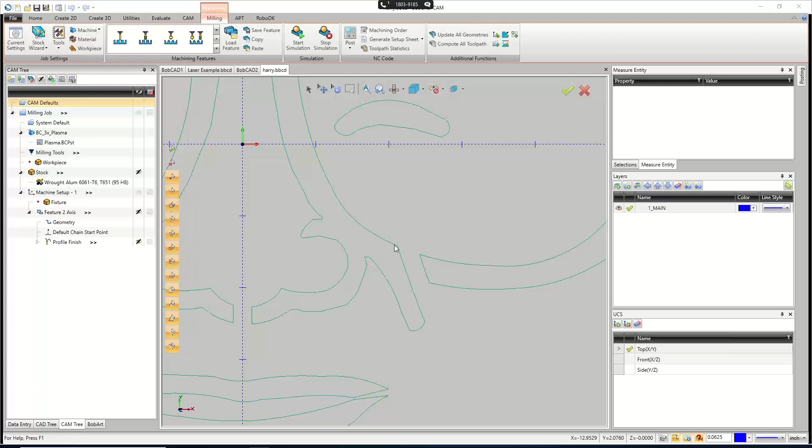It was just kind of a line that came down for the crease of his nose, and so this continued on right there. The problem that I was running into is if I make that cut all the way on the outside, all the way through here, I also have a tab for the nose there, and it would continue all the way around. Well, there's no definition for the glasses. The full glasses would end up falling out. I lose all the definition for the nose.

So I had to come in and put some little tabs on here where they made sense. And I figured that's a pretty decent spot. You don't really notice them on the sign. Same thing for the lips. I came in and I added these little tabs in here. I just drew some lines and disconnected them so that when I put my profile on it, it cuts inside of that geometry. And that's something you'll have to do whenever you're doing logos.

If you're using BobArt to do stuff like this, that's a big thing you'll have to worry about because things fall out. Sometimes you get lucky. Some logos work just fine. Actually, the Minnesota Vikings logo, I'm also a Minnesota Vikings fan, didn't take any work. I was able to just use BobArt, or actually I didn't even use BobArt. I just found a DXF of it online and was able to cut that, and everything that fell out was supposed to fall out, and it actually came out with a really good overall clean thing. I have it somewhere here. Yeah, I got it right there.

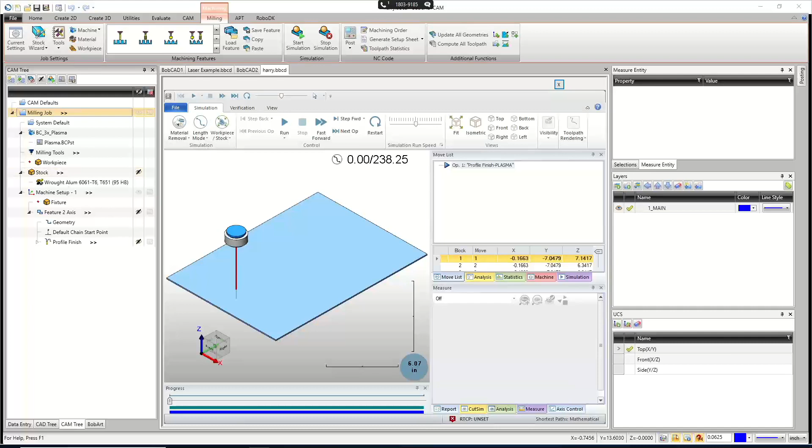So this one, when we go and cut it, you say run. There it is. Cut the whole thing. And what I'll do now is turn on the measure function. And this is where I like to go to remove chips, only keep one part. And I click on the area I want to keep. And everything that falls away is what would fall away at the machine. And so there is the sign, little Harry Caray logo. So there it is. Quick and simple, and you get an idea right from the simulation.

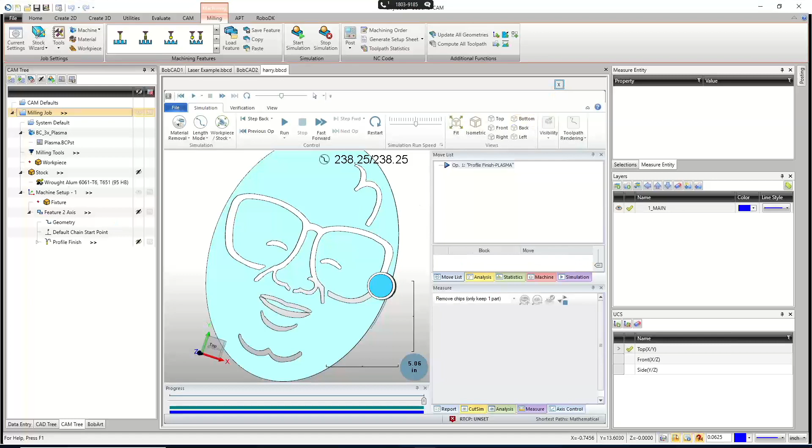You'll know when you get it wrong, because in the simulation, if you go to clean up the parts and something falls away, there was probably something that didn't get cut right, or some tab that didn't get created and it fell out. Like I said, the Vikings logo, though, if I open this guy up, there's the tool path for it. I didn't have to do anything. I was able to just come in. I didn't have to add any tabs to this. Every bit of geometry on here that's supposed to fall out is its own separate piece of geometry.

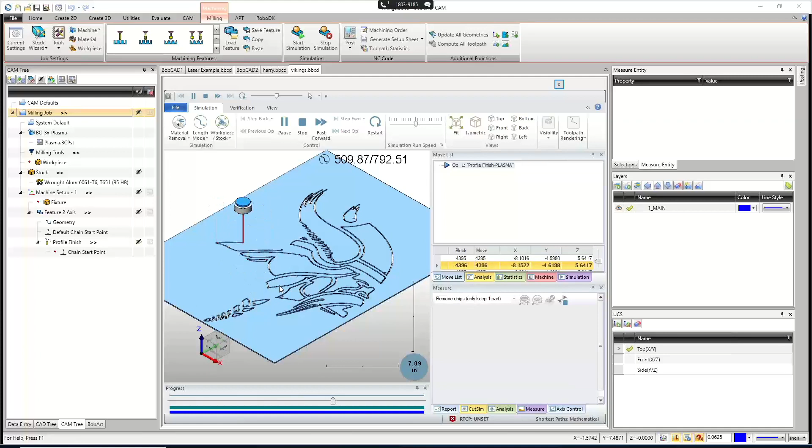So something like this, if I say start simulation, I could say run. This is on a plasma as well, not a laser, right here. It's doing all these cuts. These are all still internal cuts that I got going. I might have some leads that are a little bit too big, like you can see right there. Has a little chop out of it from the lead in right there. But let me close down this thing. Quit. There we go. And there it is.

So now I'd go use that remove chips, only keep one part. I'd go find where I want to save. So I'll go to right here and click on it with my middle mouse wheel. And with this many pieces, it might take a little bit longer to process, but that is the cut. So I'll go to a top view, and that's what it looks like. So a lot of it comes down to finding good geometry or good parts. There's a lot of websites out there if you're doing some sign making, logo stuff, where you can search for files online and find some good ones. So you could go in, I'm just loading up a new browser here.

All right, move this over, new window. So I could go into Google and say, I'll just do the same one. So Minnesota Vikings logo. And then whenever I'm looking for stuff, I know a lot of you guys might have BobArt, and it's a very cool feature. That all takes having the right kind of pictures and stuff like that.

So there we go. All right, so we've talked about tabs and whether or not you need them. In some situations, you will have to go in and add your own tabs. Just depends on what you're making. Depends on what you're cutting. So there we have it.

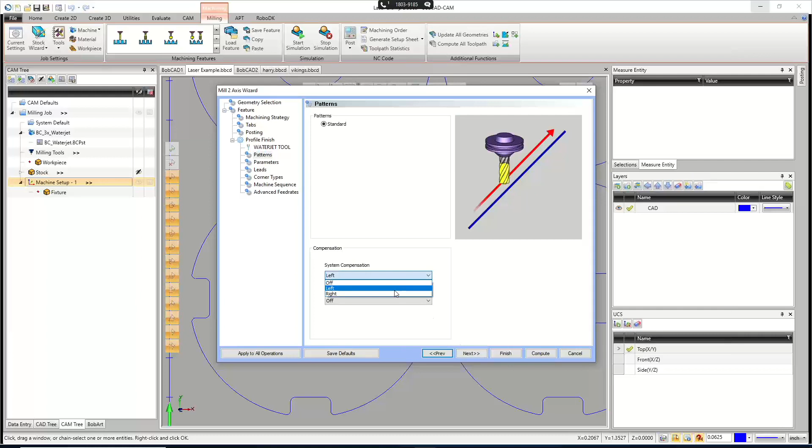Other than that, the rest of the settings are the exact same as what we just did for the laser. So I'm going to go with a right angle. 1/4 inch is fine, probably more than we need. Let's say 0.1. Next again, corner types, no changes. Sequencing, I'm only doing the one part right now, so I'll leave it right there. And then our advanced feeds. Excuse me. So when we're all done, we can hit compute.

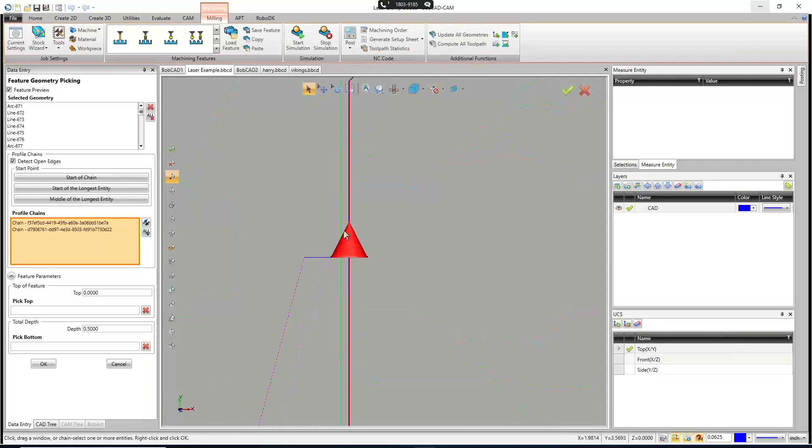And I didn't reverse the direction. Oh, I must have clicked that one. So let me just right click and say modify. And I'm just going to flip the direction of that arrow there. Put that on the inside. This one's good. I didn't have to change it. I must have double clicked on the arrow. You can flip the direction of the arrow just by clicking on it. And so sometimes when I move it, I accidentally click a second time and flip the direction of it. So there we go. Hit OK. And then we go and compute that.

So now when I post my code, this will have my feed rates in it all throughout the program. There will be feed rates actually running in here. And so for me to save this toolpath with those feed rates, I would right click. I'd say save feature. And for this one, it would be Waterjet. Waterjet. And then you don't want to put decimals.

All right. The fastest way for your computer to corrupt a file and kind of ruin the file is by having an extension that it doesn't know. So a lot of people will come in here and they'll say 0.5 thick. The dot that you put in your file name designates the file extension. That's why you have a .bbcd or a .dxf. So the problem with this is it sees this file extension as .5 space thick. So you have to come up with your own little code there.

Just spell it out. 1/2 inch thick. Let's capitalize that T there at least. And then I'll say save. So that now is going to be saved for any job I use 1/2 inch material on.

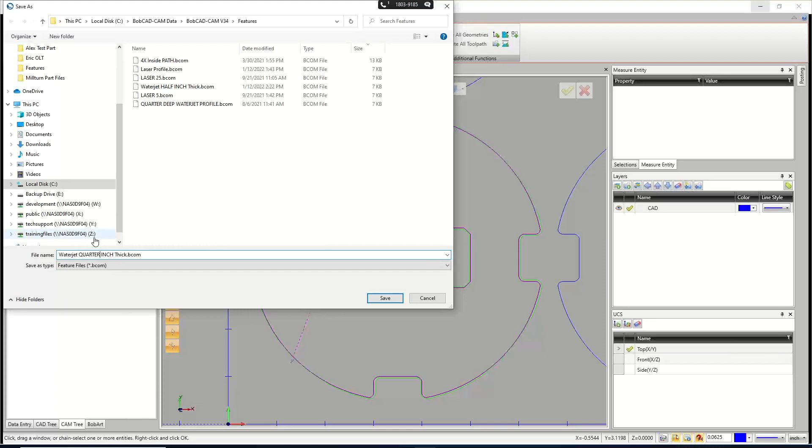So I'd save a toolpath for every different thickness of material that I'd have, because it's going to save the feeds and speeds. It's going to save my pierce dwells. If you're working with a plasma, it's going to save your pulse frequency and all that stuff. It's all saved in there, so it's one less thing that I have to worry about.

Now, the only thing I really have to worry about when I'm setting up jobs for this 1/4 inch or 1/2 inch thick part is the leads themselves. What's the thickness of the material, and where am I working? If I go and put a lead, just like we saw with this Vikings one here, where is it? There's that one little spot. Right there. So in this area where it gets real tight, it's actually starting.

If you look, the start point for that, it doesn't show it because it's such a small area. The start point for that guy is actually happening right where that lead is. It's here, but the length of it is actually way over here. So that's a problem. That's why we had that little overburn there. This one really depends on the thickness.

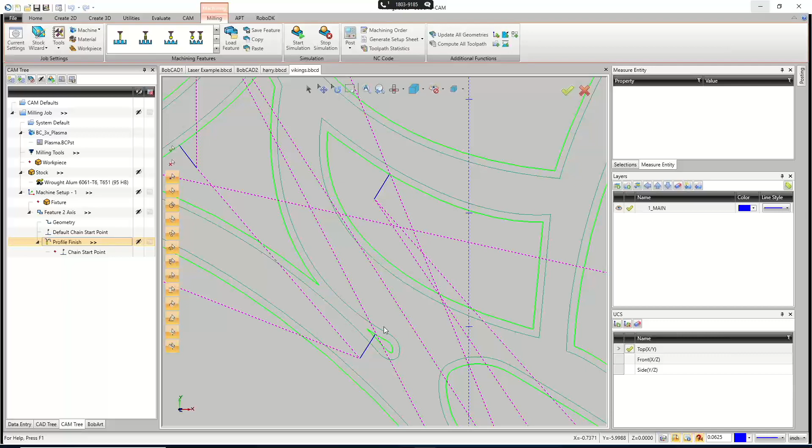But that's the only thing I'd have to worry about after I get this all set up. All I'd have to worry about is making sure my lengths for my lead ins and lead outs are good. And after that's done, post code, ready to go. All right. So let me go ahead and blank this out. Oh, I just got to click off that.

Now, is there anything specifically you guys have been struggling with or anything that's been hanging you up when you're working with your plasma? Is there anything that's been throwing you off? All right. Well, if there's not, we'll continue on.

There's really not too much to the laser plasma water jet. The most important thing I would say is when you're making this stuff, you just got to pay attention and use your simulation. Make sure to trim out that geometry in the simulation so you see what falls out, and that'll give you a really good idea of what it needs.

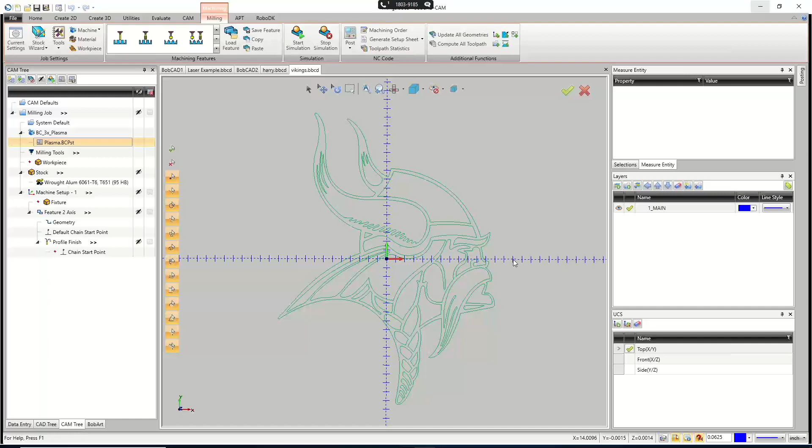So, all right, is there any way to pierce only hole centers for drilling and reaming later? Other than drawing real tiny arcs, I don't know. Let's try it. Let's do it. I feel like there isn't a way other than drawing real tiny arcs. But let's try doing a, how would it do this? This is the Waterjet. All right, so let's use this.

We'll remove this, and we'll try it with a point first. All right, we'll put a point right here in the middle. I don't believe that a point will do anything because it's not an option for geometry picking. You always know what geometry is available for any feature. Any feature in BobCAD, you can find out what geometry you're allowed to pick by looking at this toolbar right here. So I could actually turn it on and pick that point, but there's no chain or anything.

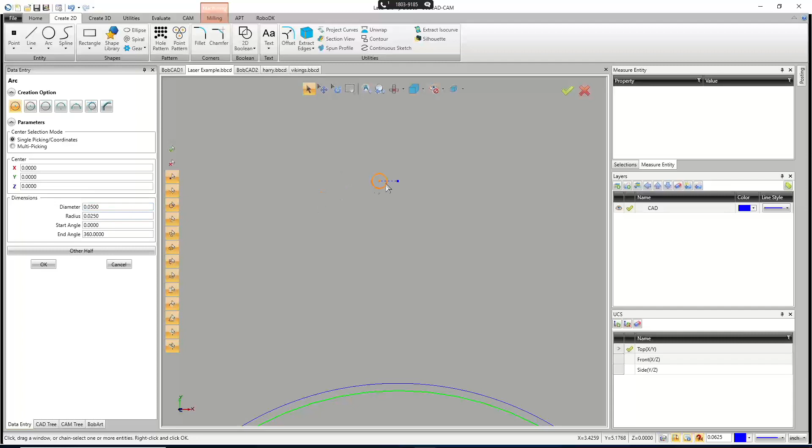So I would say you would want to draw... I feel like there is a way to do it, and I'm just blanking on it right now. I'll find out for sure, but the way I would probably do it is with a real small arc. I would look at the Waterjet. I got a 50 thou arc on here. So I'm going to start with a 50 thou diameter arc. So I'll say right here, let's go 0.05, and I'll just snap it on top of that point right there.

And so if we go and run this now, I know I've done this before. There we have it, our chain. We want to go to the right, so we'll flip it to the other side. Hit OK, and we'll just hit compute. And so 50 thou, the exact same size as the diameter of your tool, is a little bit too small. Let's go here, arc. So we went 50 thou before. We'll go right there. Let's go 60 thou. So we'll go 10 thou over our other arc.

And let's try that guy. Geometry remove, geometry reselect, pick the arc, direction, flip it, and compute that guy. And I got to turn off edit this, turn off my leads, and that little guy could work. And we might be able to go even smaller than that, and it'll just make kind of a little arc,

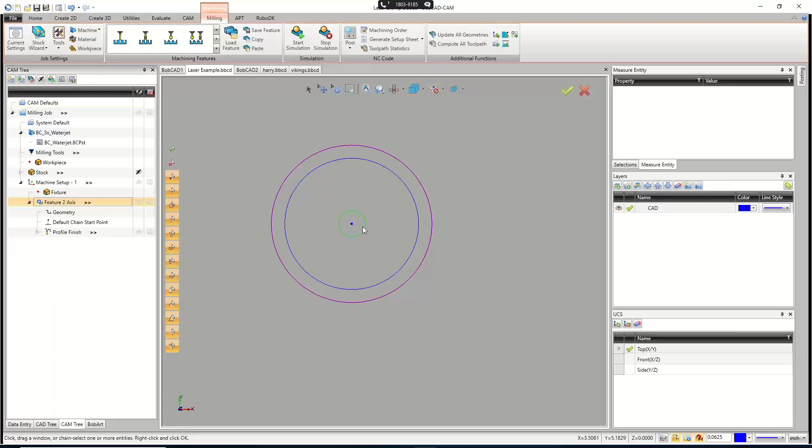but really... not that I know of. I feel like there is a way, and I'm blanking on it, though. I could definitely let you know if there's a way to pierce just the hole centers, because you're going to go drill them out later on. Oh, I have a way of doing it. I remember now. So one way of doing it, and this might sound weird, is engraving.

All right. So in engrave, let me just make, I'll put down a point. I can't engrave a point, but I can engrave a tiny little entity. So from that point, I just want to move over, we'll just say in X, 0.001. So we'll say 1 thou. Let me just try that. And then that's there. So now I have these 2 points.

I'm just going to go connect a tiny little line between them. It's, what did I say, 1 thou? Get out of here, you. To there. And then I'm just going to delete the 2 points. Just like that. So I have that little entity on there. Where the heck did it go? Right over here somewhere. There it is. So there's my tiny little line.

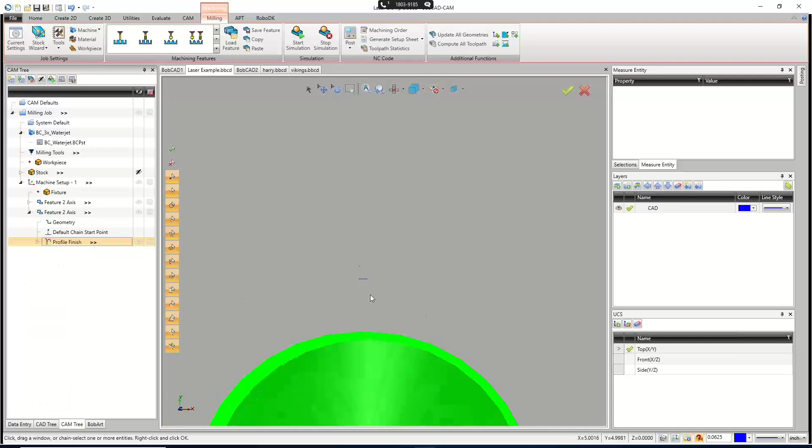And so when I go and set up my job now, let me just copy that toolpath and paste it. All right. So here's the thing. When I go and do this one, I could pick this piece of geometry. I don't really care about the chain direction because when I go to compute this, it might give me a toolpath, as you can see, but that toolpath is offset by whatever the radius of my definition for my tool is.

But it's only offset right now because on the patterns page, I have system compensation on. So we can turn system compensation off and treat it like an engraving toolpath. So it's going to turn on. In this case, it's going to move over 1 thou. No, yeah, 1 thou and then shut off.

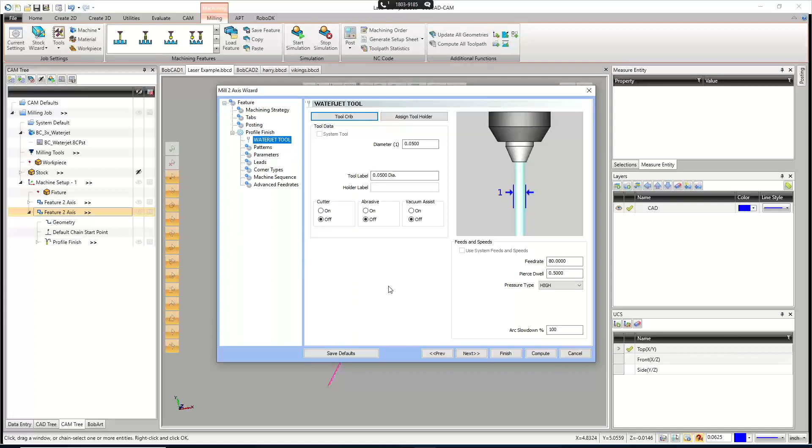So it's kind of as long as it needs to take that, but you also could set up your pierce on there. And so it basically pierces, the move that it makes would be tiny, and then it would shut off. And that could work for blasting a hole through something. I think that's how I've done it in the past with some customers that were going to end up opening up, drilling the holes or reaming them later on. Just draw a tiny little line segment. Like I said, my line just now was 1 thou. And that's enough to give me a cut.

And so if I cancel out of this, do I still have the outside one? No, let's get this one. Let's remove the old. Reselect. We'll pick this and this. We'll set our start points there and there. To the right. And to the right. To the right. No, that's wrong, isn't it? The middle one's backwards. Reverse that. There we go. So to the right puts us inside.

Don't know why it's picking the geometry backwards now, but compute that. Whoops, compute that one. And there's our cut. I don't have any leads on this one. I turned them off just for the last one. But I now have this little guy in here as well. So we can go ahead and save. And we'll just start the simulation.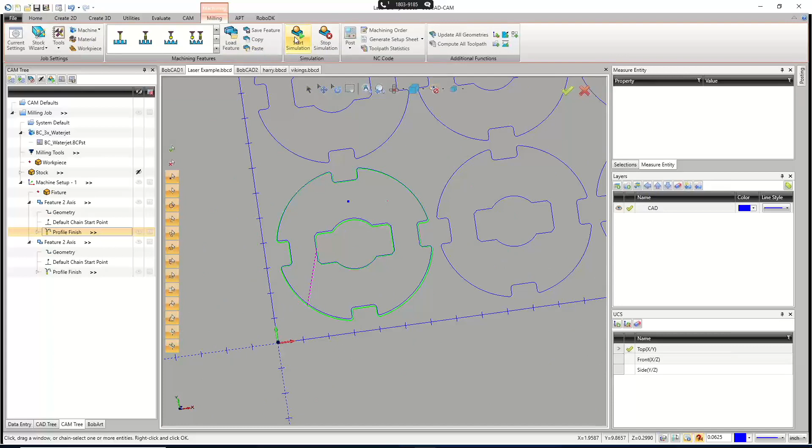And then we'll say, let's run this thing. That little hole is going to be real quick, so I don't want to go too fast. Center pocket. And now, because I did this in the order I did, it's going to do the inside and the outside and then come back and do that little pierce. I should have put the pierce above this one so that it runs in the right order. But now we'll see it should go in. Make its cut. And then there's our little pierced out hole that we had.

So again, just draw a tiny little line. That seems to work pretty good. And then make sure you set your pierce time accordingly. And with that tiny line, it shouldn't even, let's go to a top view and let me hide the tool. Hold on, visibility, tool, hide.

From that small of an entity, you can't really even tell that it's an oblong hole. But again, try it that way. As far as I know, there's no way to drill a hole with a plasma.

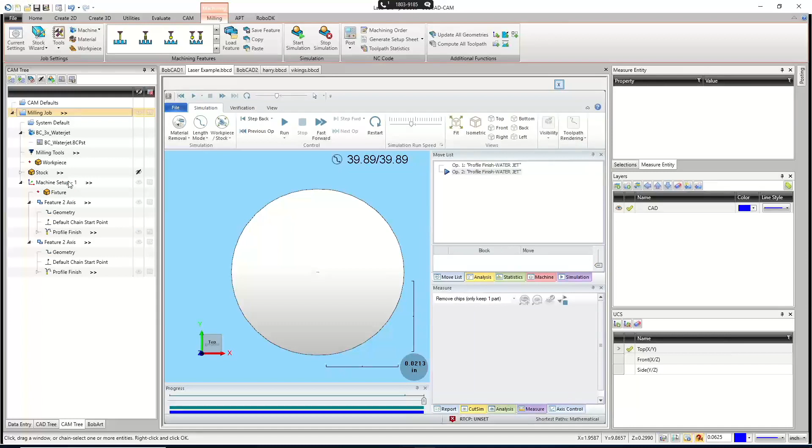Or can you? Mill drill hole, select geometry. I'm going to pick that point in the middle there. Hit OK. Diameter, that shouldn't matter. Yeah, so that's the problem.

We have no way of picking the plasma if we do drilling, right? We have no way of picking the plasma as our tool. So drilling wouldn't work. I thought maybe we could do a drill and just do an on-pierce, but that doesn't work. So, draw a little line. That should be the easiest way to do it.

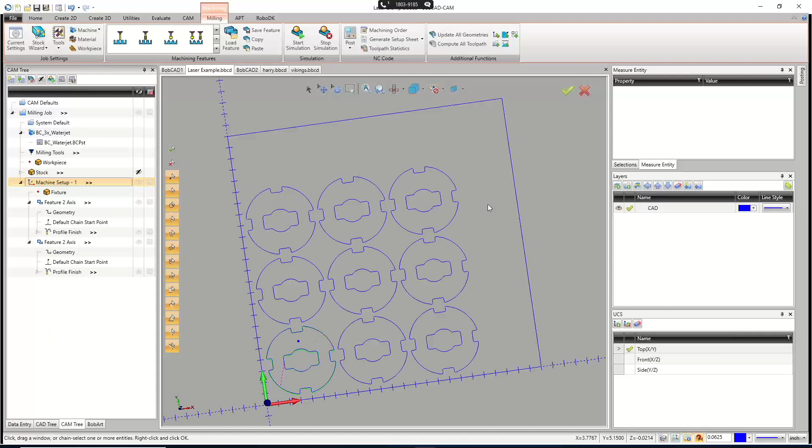And I'll talk to some of the guys. I feel like there's another way for it, but off the top of my head, I can't remember.

Any other questions? Anything else you guys are running into? All right, I'll give you a minute. It looks like someone's typing right now. Hold on.

All right, that was a good question. Thanks, guys. All right, so really that's it. It really comes down to those are the basics. It's tough to talk about laser, plasma, water jet for a super long time. The biggest thing is going to be what problems you guys run into as you're running your parts.

So if you do run into any problems, most of the time with how simple these tool paths are, a lot of the times the problems end up being caused by the main two things: the origin being in an odd spot, or the post processor's got something wrong. So that should always be your first step anyway.

Go through and set up your machine, get your post done, work with the posting department, get that all worked out so that when you're ready to actually run this stuff, it's good to go. Most of these posts are fairly simple. Even this waterjet post that I got right here has more stuff in it than some of them.

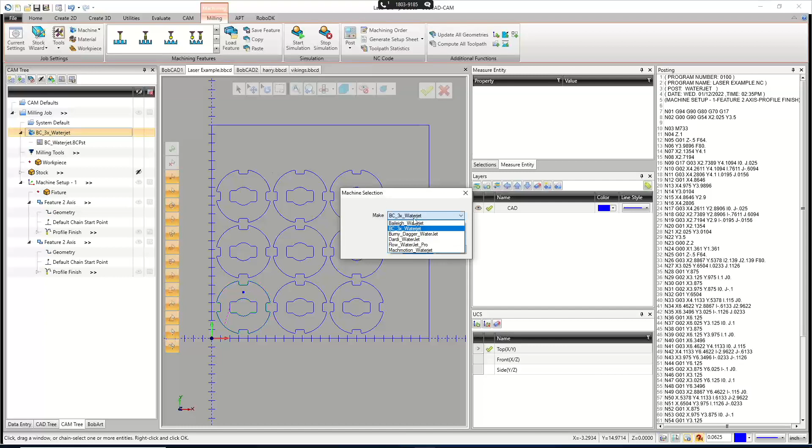If I go use the Baileigh Waterjet here, normally this is a very simple bit of code. You have your on-off commands, and then you got all your settings. And this is even more complicated than some of their plasma post — it uses a G92.

So this one uses... there's your pierce delay, custom beginning. There's your pierce — that's all your abrasive stuff. So this one uses a G92 as well, as opposed to some of your guys' machines, which might use a G54. I'm not sure, it all depends.

Any other questions I could answer for you guys today? Like I said, laser, plasma, water jet's about as easy as it comes. It's just figuring out whatever you guys might be stuck on. If it's CAD, that's a different story — there's a lot to the CAD that you got to know how to do. But yeah.

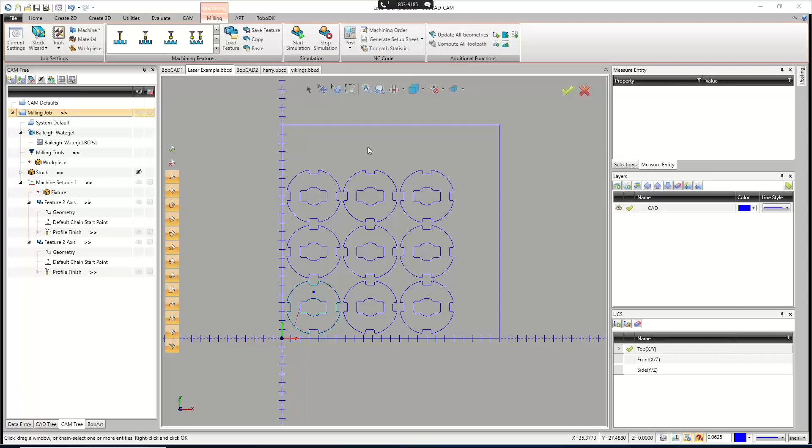So, what about modeling custom lead-ins? Absolutely. I usually do custom lead-ins on a situation like this one here, where I'm using tabs or doing something like that. Let me blank out all the toolpath here.

So something like this, custom leads are very easy to use. The thing about custom leads is you're usually doing it as sort of an engraving toolpath. So the first thing I would want to do — this is my laser, and I got it set up to, let's say it's at 10,000. I'm just going to scale this up and make it 100,000 just so we could see more of what's going on. The problem is right now I have it doing a compensated cut.

So it offsets automatically. All right — he's saying Hypertherm has Perfect Hole or Diameter Pro, not sure, but it spirals in for holes with overburn, no default options to do that. No, we don't really have anything like that. I mean, we do, I just never tried it.

Let's put down an arc. Let's say its diameter is just a half inch for now. And we'll slap that bad boy right there.

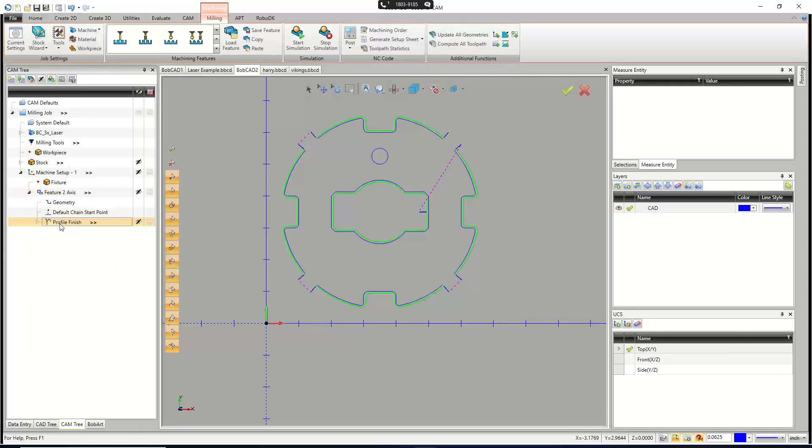Now, in theory, and I'm not sure about this theory, but instead of using a profile finish, I could go in and use a different 2-axis toolpath. So let me go ahead and pick this. And I don't need to worry about the direction now. The reason being, instead of using a profile finish, I can go and use a pocketing strategy.

Now, again, I've never tried this before, so this would be something you'd have to let me know how it goes, but it should potentially work. So I'll set it up with a pocket.

I'll go next till I get to my laser tool. So there's my tool right there. There's the diameter. So I'll say next.

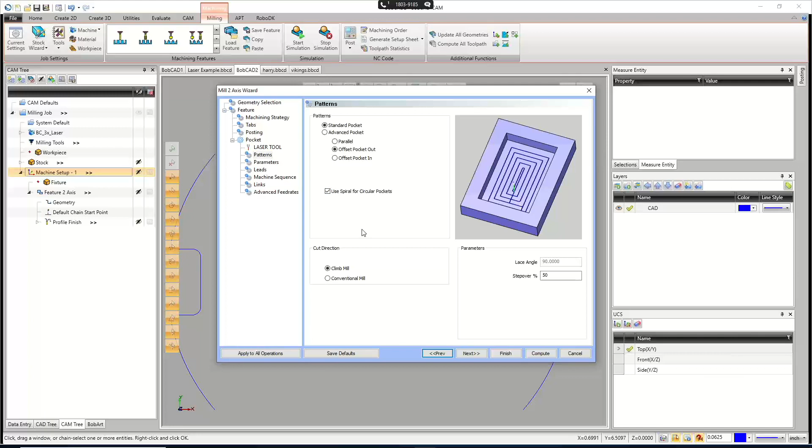I could actually go in and say I want to use a spiral for circular pockets. If it's a nice hole, I could do a spiral for circular pockets. And then you could do a step over amount.

I would equate this, the way I think of this working, to be the same as a wire EDM. With wire EDM, the normal way of cutting is you cut the outside, just like you guys do with a laser, a plasma, or a water jet. You cut the outside and the slug falls out. But there's another option called a coreless cut, which is used to size up holes without dropping a slug. Basically, we're turning the entire pocket into chips.

So we have our spiral. It knows the size of the laser, and we have a step over that we could set up. I'll leave it on 50%, and we'll see what we get. But this use spiral for circular pockets should be able to do it.

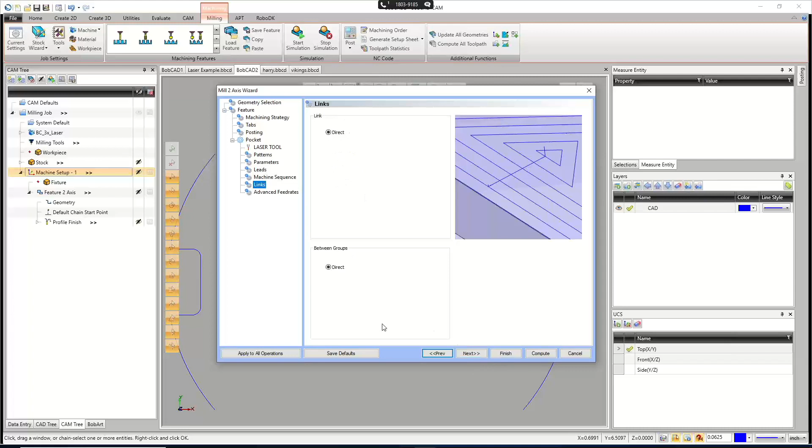For the parameters, we just need to make sure our side allowance goes to 0 because we're not running a finish pass after this. For the leads, it's just going to plunge in with a single depth. We don't want to change that. Then the sequencing would be for multiple pieces. Links, shouldn't have to worry about that because we're doing that spiral. And then we have our advanced feed rates.

So we'll hit compute, and there it is. Now, like I said, I've never done this before, but in theory it should work out just fine.

You're basically piercing through the center of the hole. I believe because we have it set up with the laser, we could set up a pierce time on there as well, or any of them. You set up your pierce. Let's see what it looks like in the simulation.

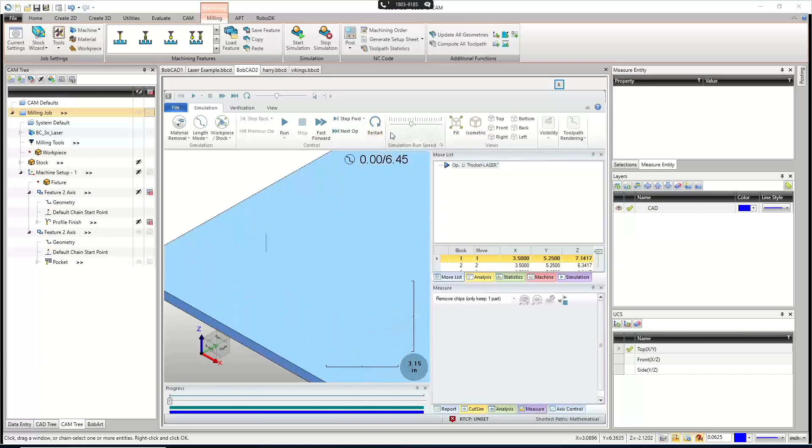All right, so I'll leave this one pretty slow. I'll slow that down. 50% should be good, but we might go down to 45% or something like that. We'll find out, we'll see what it looks like.

So it's going to pierce in. Oh, I got my tool turned off. Hold on, pause. Tool, show. There we go. And run.

Oh, it's taking forever, eh? There we go. So it's going to pierce in, and then spiral out from there, just like that coreless cut.

Now that doesn't take into account any overburn, but your pierce is going to pierce, and then it's going to be dependent on the size of the hole more than anything. I think if it's too small of a hole to even take care of the overburn, there's nothing we could do about it. It's going to burn through regardless.

So on bigger holes, you should be able to do that with a pocket. Good question, I haven't used a pocket on this before, so that's a good one. But it's a pocket, and then I would only try... I mean, you could use it on whatever you want. You could get even crazier with it.

It depends on what package of software you guys have. Some of you will only have the Mill Express, which is really all you need for laser, plasma, water jet, because you'll have pocket. What you don't have available to you is the advanced pocket. You have the morph spiral and the adaptive roughing.

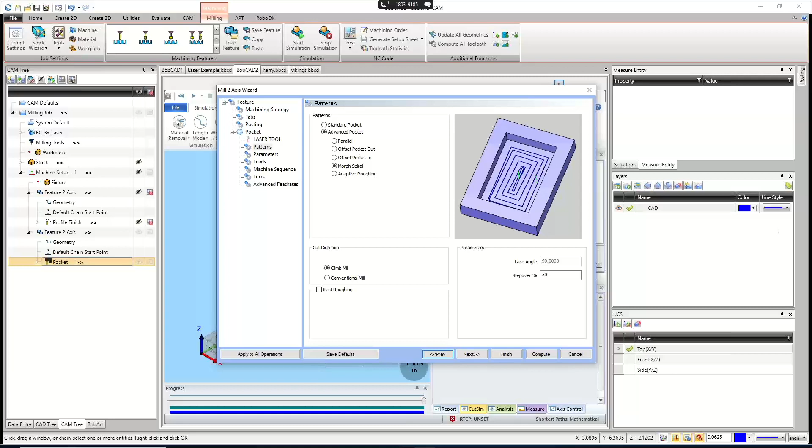Good question. All right, let me close out of the simulation. So modeling custom leads, back to that real quick, gets a little bit more intricate, because usually when you're modeling leads, you're not offsetting your tool path.

Right now we're offsetting this entire tool path. Let me go to a top view here. We're offsetting that entire tool path.

But if I was to go model my leads, maybe I wanted some leads, I'm just going to add some splines to this to make it kind of wacky here. Maybe I got this goofy lead, I don't know why I do it. Let's go there, hit OK. There's one lead, and then on the lead outside, it's over here. Hit OK. So those would be my custom leads.

The problem is it's going to offset from this lead over and then kind of end up here. So what I'd actually do, get rid of those two splines, is offset my geometry over.

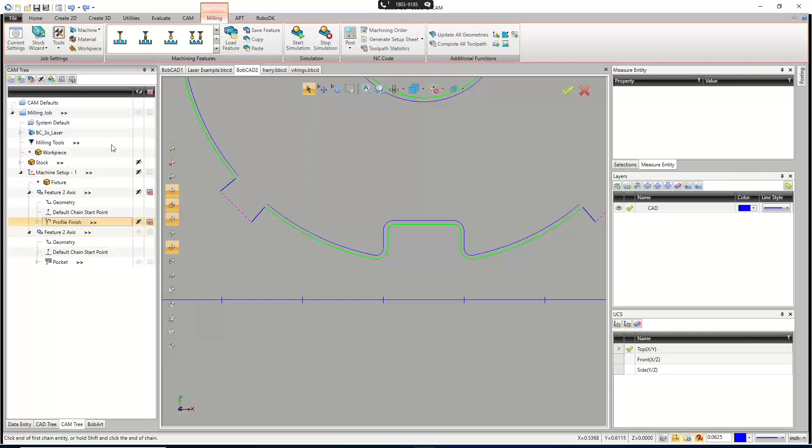So under Create 2D, we have offset. I think this is the toolpath I changed to 100 thousandths - yeah, tool diameter I set to 100 thousandths. So I would offset this by 50 thousandths, so distance 0.05, and I'd start by offsetting that geometry outward.

Let me hide the toolpath real quick. And then off of that line there, I would add my custom leads. So I'll do my spline, and then I'll add my spline. And there's my two custom leads.

Now the difference in how I run this would be instead of doing the geometry like this with the offset on it - let me reverse the direction there - that still applies the offset.

So the way we fix that is by doing an engrave. I don't mean go use an engraving feature, I mean in the feature of the profile, to turn it into an engrave, on the patterns page we would turn our compensation to off. That is going to do a center line cut and follow your geometry.

And then normally with that, I would get rid of the leads because I still have my right angle leads. I would set a vertical lead in, and then that way it pierces right there, cuts around, and it's done.

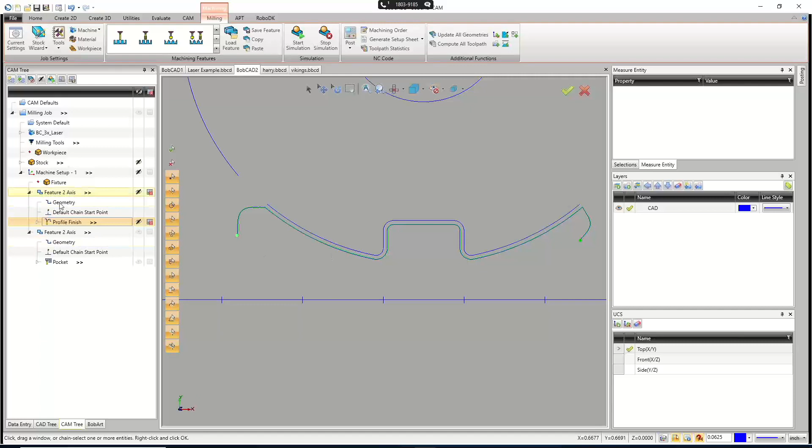And I've met some people where when they get their parts from whoever gives them their parts, or when they draw their parts, the way they're actually drawn takes into account the laser or plasma diameter automatically. They have that built into the drawing, so they would never use compensation. All their outside pieces of the drawing are made a little bit bigger by whatever the radius of your cutter is, and any inside shapes would be smaller by that same amount, so that you're doing that center line cut.

Basically, when we do this center line cut, the edge of our tool, or plasma, or whatever, ends up running along that and leaving us that edge. So yeah, you could totally add your own leads, but usually when you add your own leads, you're going to be engraving - that's the most common way of doing it.